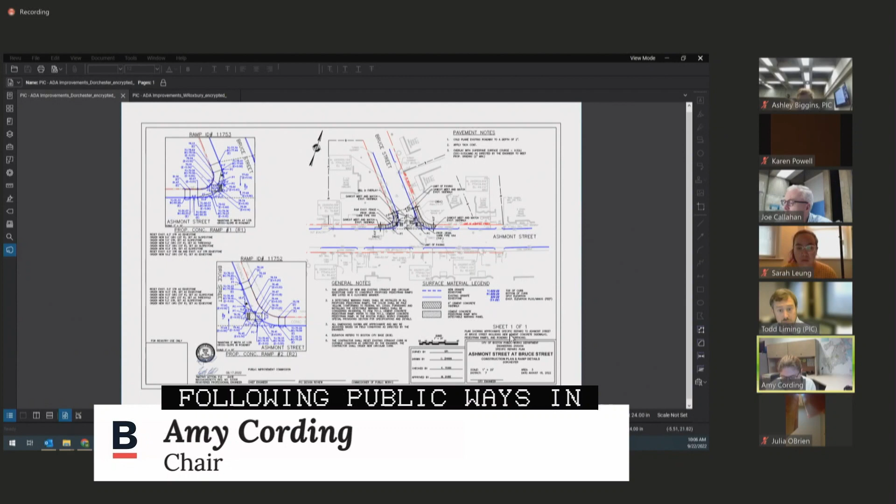Public hearing on a set of petitions by the City of Boston Public Works Department for the making of specific repairs within the following public ways in Dorchester and West Roxbury, consisting of curb realignment, roadway and sidewalk reconstruction, as well as new and relocated pedestrian ramps, storm drain infrastructure, and driveway curb cuts: Ashmont Street on its northerly side at Bruce Street at Ashmont Street, Boylston Street on its northeasterly side at Belmore Terrace at Boylston Street.

New business 825-2022 is shown on 2 plans entitled City of Boston Public Works Department Engineering Division Prepared Plan, Ashmont Street at Bruce Street, Dorchester, 1 sheet dated August 18th, 2022, and a City of Boston Public Works Department Engineering Division Specific Prepared Plans, Boylston Street at Belmore Terrace, West Roxbury, 1 sheet dated August 18th, 2022.

Good morning, Commission. Jeffrey Alexis with the City of Boston Public Works Engineering Division. I'm here joined by Michael Dube and Joe Johnson from GPI. In collaboration with our Public Works Construction Management Division, we are proposing to make some pedestrian safety improvements at these 2 locations, Ashmont Street and Bruce Street, as well as Boylston Street and Belmore Terrace, to essentially put these ramps in compliance.

It requires some curb geometry changes, as well as some drainage work. I will turn it over to Michael Dube to explain a little bit more of what we're going to do at these locations. Thanks, Jeff. Michael Dube with GPI.

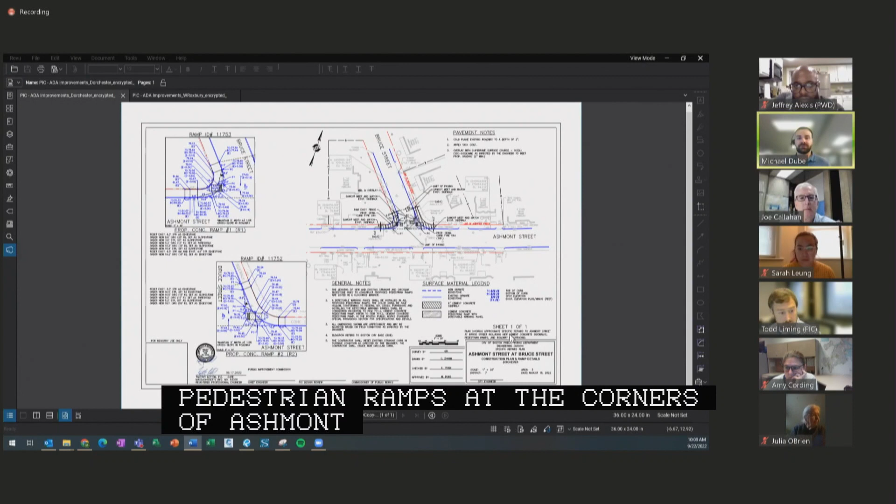First location, as Jeff mentioned, is Ashmont Street at Bruce Street in Dorchester. Scope of the work includes reconstructing 2 existing pedestrian ramps at the corners of Ashmont and Bruce Street to provide ADA compliant pedestrian ramps. Work includes minor realignments of curb lines to better align the approach and minimize pedestrian crossing length, sidewalk reconstruction, and pavement mill and overlay.

We also have a second location, which is Boylston Street at Belmore Terrace in West Roxbury. Again, we're installing 2 ADA compliant pedestrian ramps at the corners of Belmore Terrace and Boylston Street. The work includes minor realignment of curb lines to align the Belmore Terrace approach and minimize pedestrian crossings, sidewalk reconstruction, pavement mill overlay, and the reconstruction of one drainage structure at the northeast corner.

During the initial new business hearing, there was one comment to coordinate with BTD regarding a future contraflow bike lane on Boylston Street. We reached out and BTD indicated there was no conflict between our plan and those future bike lane improvements. I'm happy to answer any questions.

Questions or comments from commission members? PIC staff? All set. All right, I'll entertain a motion on public hearing item number 1.

I make the motion to approve a set of petitions by the city's Public Works Department for specific repairs at Ashmont and Bruce Streets, and also Boylston Street and Belmore Terrace, as more particularly read into the record by the chair.

Second. All in favor? Aye. Aye. Aye.

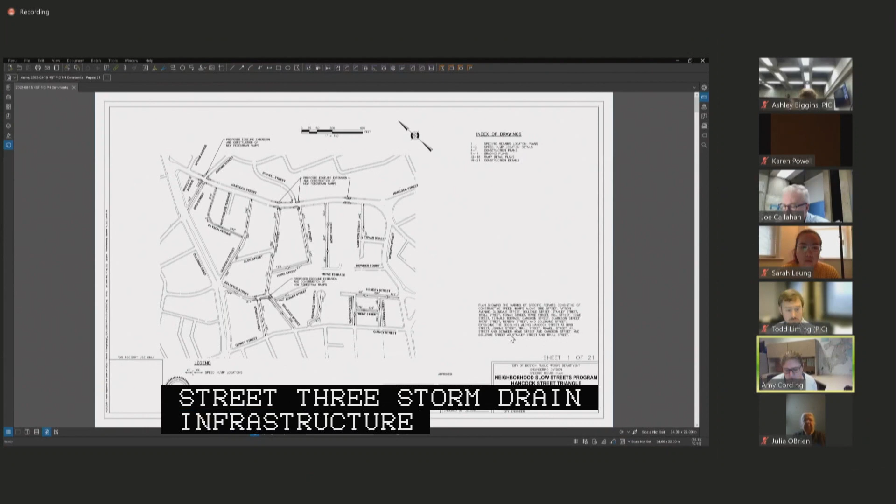Hancock Street, generally between Bowden Street and Columbia Road. Birch Street, generally between Hancock Street and Columbia Road. Payson Avenue, generally between Hancock Street and Glendale Street. Glendale Street, generally between Hancock Street and Columbia Road. Bellevue Street, generally between Quincy Street and Columbia Road. Stanley Street, generally between Quincy Street and Bellevue Street. Trull Street, generally between Hancock Street and Bellevue Street. Ronan Street, generally east of Bellevue Street. Ware Street, generally between Trull Street and Rill Street.

Rill Street, generally between Hancock Street and Ware Street. Howe Street, generally between Hancock Street and Howe Terrace. Ferndale Terrace, generally northeast of Quincy Street. Cameron Street, generally between Hancock Street and Tovar Street. Clarkson Street, generally between Quincy Street and Trent Street. Trent Street, generally between Clarkson Street and Coleman Street. Henry Street, generally between Bowden Street and Clarkson Street. Coleman Street, generally between Henry Street and Trent Street. Jerome Street, east of Hancock. Rowell Street, northeast of Hancock Street.

New business, 8/25/2022, is shown in a set of plans entitled City of Boston Public Works Department Engineering Division Specific Repair Plan, Neighborhood Slow Streets Program, Hancock Street, Triangle, Dorchester, 21 sheets, dated September 22nd, 2022.

Hi, good morning. Dan Merrill from the Boston Transportation Department. I've been working on these plans with Public Works. This is the latest in our neighborhood slow streets zones, as mentioned, and I have Radu Nan from Kittelson here, who is going to walk you through the plans.

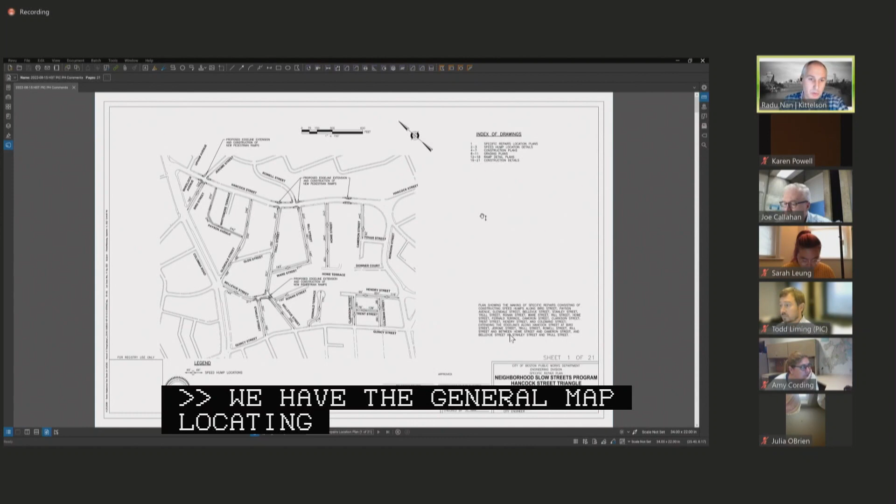Thanks, Radu. Good morning. In front of you, we have the general map locating the speed humps proposed for the interior streets within the zone. The plans propose installing 24 speed humps, generally spaced between 300 and 150 feet apart. The distance between these speed humps was determined based on field observations.

I have some specific sheets outlining the individual location of the speed humps that I can flip through, but before moving on to those and specific repairs at specific intersections, I'll entertain any questions.

Questions or comments from commission members? Questions or comments from PIC staff? We're all set on the speed humps. Do have a couple comments on some of the curb extensions, but I'll let Radu present that first.

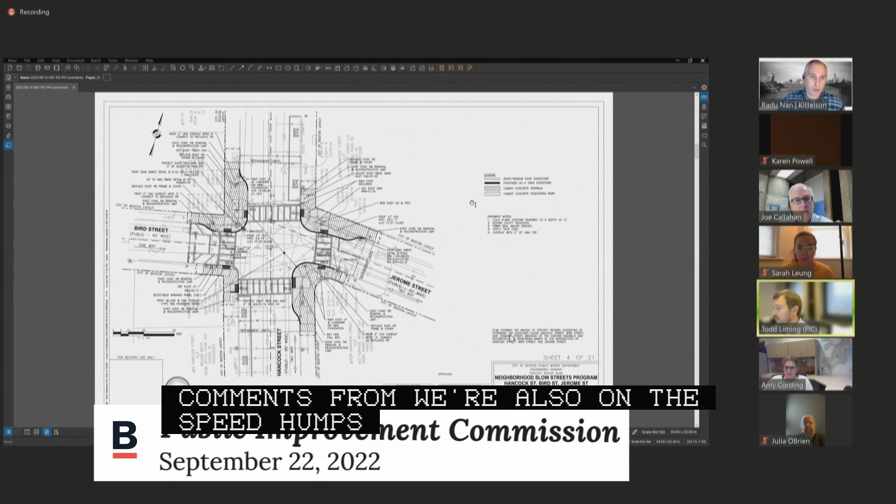Sure. Thank you, Todd. The first intersection we're focused on your screen right now is between Hancock Street, Bird Street, Jerome Street. The specific repairs at this intersection include minor realignment of the curb lines, reconstructing of sidewalks, reconstructing pedestrian ramps on all corners to bring them into compliance with the ADA requirements, narrowing the street pavement widths to promote shorter, safer crossing for pedestrians, drainage improvements, streetlight relocations, and milling and overlay of the pavement surface within the intersection area.

Are there any questions specifically about this location? We can move on. All right, let's keep moving.

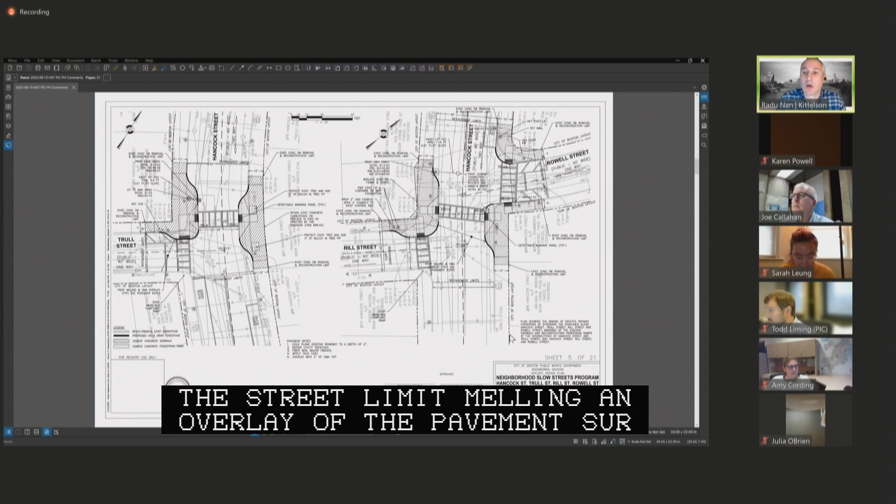All right. Next locations are the intersections of Hancock Street, Trull Street, and Hancock Street, Rill and Rowell. Similar street repairs as previously listed for the previous intersection, the realignment of edge lines along Hancock Street, Trull Street, Rill, and Rowell Streets, reconstructing of pedestrian ramps, narrowing of crossing distances for pedestrians, reconnections or adjustments to the street drainage infrastructure to maintain positive flows within the street limits, milling and overlay of the pavement surface, and I believe those are all of the proposed changes within these two intersections.

In one streetlight relocation.

Next location along Hancock Street is generally in front of 131. This is a charter school. The proposed specific repairs here include realignment of the curb lines on Hancock Street to narrow the existing crossing and constructing of ADA compliant pedestrian ramps to facilitate the crossing at this location. The reconstruction also includes sidewalk repair and two driveways and a new drainage inlet to maintain positive drainage within the street limit. Milling and overlay is also included within the limits of the reconstruction at this area.

Our last location is a system of two intersections, generally located on Bellevue Street, between Stanley Street and Trull Street.

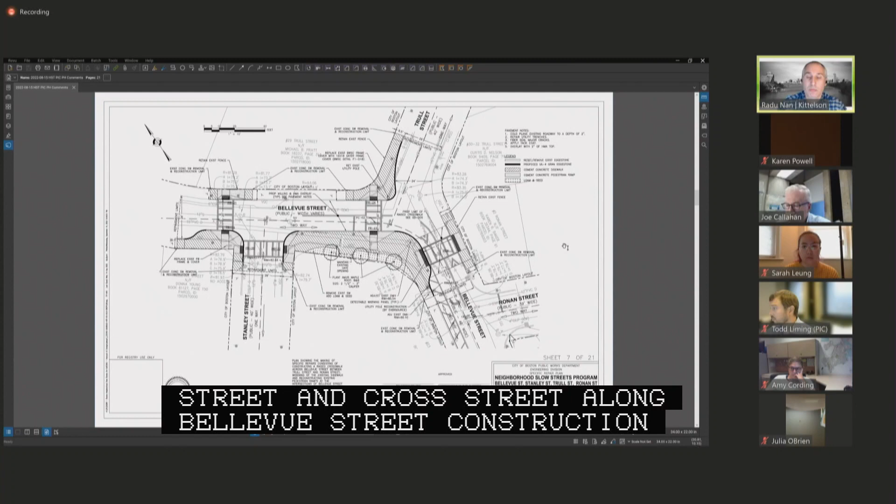The proposed repairs here include reconstruction of sidewalks and realignment of existing curb lines, expanding the sidewalk width between Stanley Street and Trull Street along Bellevue Street, construction of a raised crosswalk south of the Trull Street intersection with Bellevue Street, reconstruction of pedestrian ramps to make them ADA compliant, and the planting of new trees within approximately 290 feet of proposed pervious space along the Stanley Bellevue Park frontage.

I think Todd's got a question here, but it pertains to your loam and seed. Sure.

I had a conversation with Stephanie as well, with BTD, and she confirmed that these loam and seed areas here in front of the park are going to be switched out to standard tree pits, open tree pits within a cement concrete sidewalk. We'll make those adjustments and resubmit the plans for your records.

Yep, that'd be great. Just have that show up on the Mylar. It's perfect.

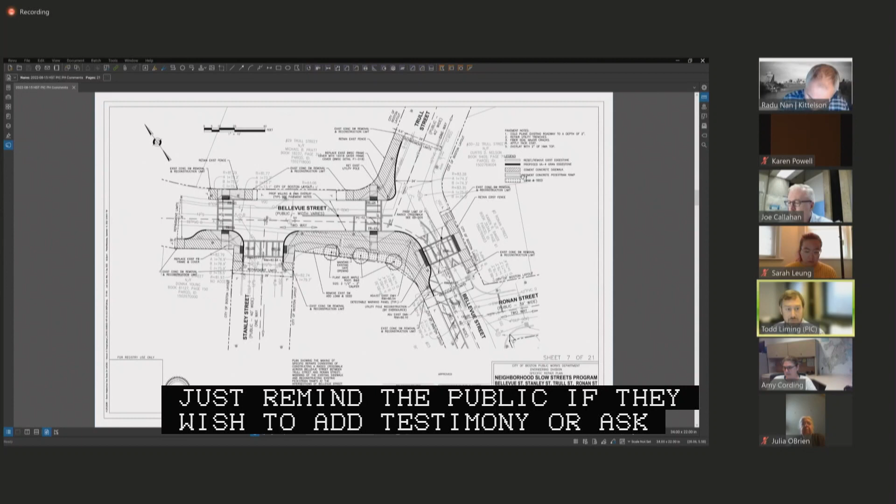I'll entertain a motion on public hearing item number 2. I make a motion to approve a joint petition by the city's Transportation Department and Public Works Department for the making of specific repairs in Dorchester, in the neighborhood of Hancock Street, and as the specific location as read into the record by the chair. Second. All in favor? Aye. Thank you.

Public hearing item number 3 on a joint petition by the City of Boston Transportation Department and the City of Boston Public Works Department for the making of specific repairs within the following public ways in Roxbury consisting of new speed humps. Abbotsford Street, generally between Walnut Ave and Harold Street. Brookledge Street, generally between Humboldt Avenue and Elm Hill Avenue. Crawford Street, generally between Walnut Avenue and Warren Street. Crestwood Park, generally north of Townsend Street. Deckard Street, generally between Warren Street and Humboldt Avenue. Harold Street, generally between Seaver Street and Waumbeck Street.

Harrishof Street, generally between Walnut Avenue and Humboldt Avenue. Hazelwood Street, generally between Warren Street and Sylvia Place. Hollander Street, generally between Holworthy Street and Crawford Street. Holworthy Street, generally between Hollander Street and Walnut Ave / Crawford Street. Homestead Street, generally between Walnut Ave and Elm Hill Avenue. Hutchings Street, generally between Elm Hill Ave and Harold Street. Munroe Street, generally between Walnut Ave and Humboldt Ave. Parkview Street, generally between Seaver Street and Hutchings Streets. Ruthven Street, generally between Walnut Ave and Elm Hill Ave.

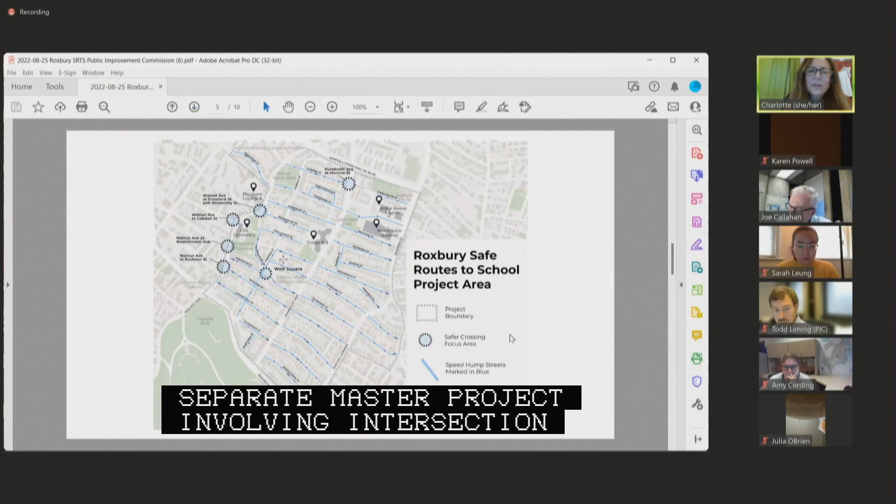There have been 3 sort of sub-projects out of this. There was a demonstration project last year involving a street mural. What we're discussing today is the second part, the speed hump project, and then there's a separate MassDOT project involving intersection improvements. This diagram, posted online, shows the 6 intersections where MassDOT will be making improvements, as well as the locations of the speed humps we're discussing today.

And the MassDOT project is on a different time frame. They expect to do more community engagement this fall and construction next year or the following.

So the speed hump plan involves speed humps distributed widely throughout the neighborhood on the residential streets, not on the main streets where we know there will be emergency traffic and buses. There are approximately 93 speed humps, spaced generally between 200 and 250 feet apart.

We avoided surface utilities, so any types of manholes, catch basins, any type of utility covers, streetlight covers. We avoided driveways, trying to stay a minimum of 10 feet away from any driveway. Where there is a driveway, we prioritized drivers backing out on one-way streets so that they wouldn't hit any speed humps while backing out. So I'll go back to the plan, and if there are any questions, I'm happy to answer.

Thanks, Charlotte. Questions or comments from commission members?

Questions or comments from PIC staff? No. For our phone-in testimony, you may press star 6 to unmute yourselves at this time.

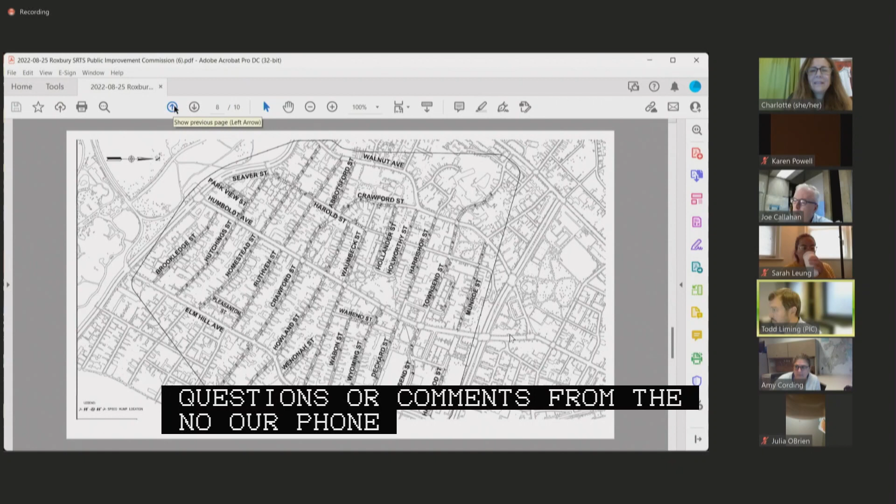Oh, can't hear you if you're speaking. For what it's worth, my understanding is that this individual is going to speak in support of this project. Charlotte may be able to fill in the blanks, but we invite you to try one last time, star 6. Yeah, he asked, so I've got him on speakerphone. I don't know if we'll be able to hear, but maybe we can try it. David, would you like to try speaking?

Yeah, good morning, can you hear me okay sir? It's pretty hard to hear. Yeah, let me try again. How about now, can you? That'll work, give it a shot. How are you? They're good. Oh, keep, got to say something. I can't hear him. Yes, I think they're interested in hearing your comments.

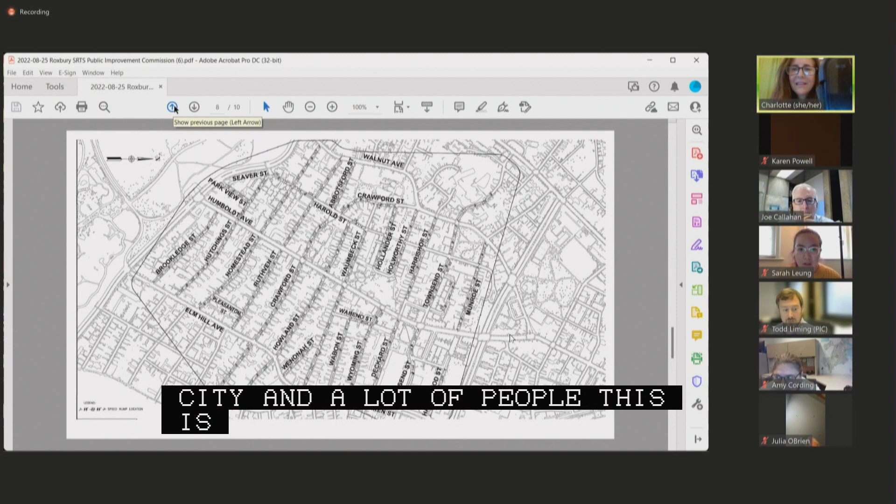I'm sorry, Charlotte, he's breaking up. We really can't understand what he has to say.

The audio's not working, but if I can summarize, he's saying that he's blind, and there are many people on the street who are very concerned about the speeding, up to 50 miles an hour, so he strongly supports the speed humps and wants them to happen soon. Is that a fair assessment?

Yes, and also let them know that people are afraid to get out of their cars because of the speed that drivers travel at on that street — they're afraid a car will take the driver's door off or the passenger door off and drag them down the street as well. So, people are afraid to get out of their cars, afraid that they will get dragged down the street.

Great, any other questions or comments from the public? All right, hearing none, I'll entertain a motion on public hearing item number 3.

I make a motion to approve a joint petition by the City Transportation and Public Works Department for the making of specific repairs in the general area of Humboldt Ave, Warren Street, and Harold Street, with the specific locations as more particularly read into the record by the chair. Second. All in favor? Aye. Aye.

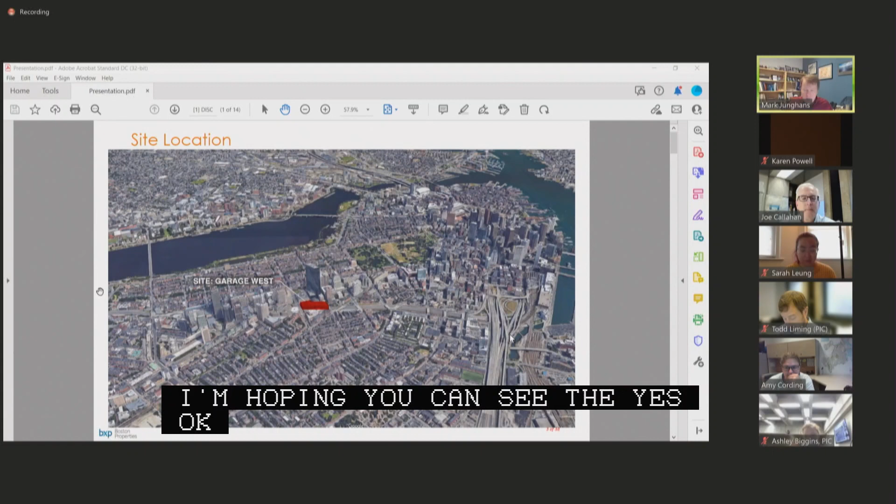This is for 171 Dartmouth Street, the first phase of the Back Bay South End Gateway project. I'll zoom in a little. It's located at the intersection of Stuart Street and Dartmouth Street in the Back Bay, next to the formerly John Hancock Building. This is the existing garage being redeveloped as the Back Bay South End Gateway project.

The first phase involves a 28-story office building with associated ground floor retail. You can see the existing Back Bay station here. These are future buildings currently planned, the Simon Building here, and then 3 future phases of this project. The building we're talking about today is the one in white.

It was presented a couple weeks ago, but I thought I'd give a quick refresher. This is Dartmouth Street here, Stuart Street just in the background. The proposed project is shown here. Once again, Dartmouth Street here, Stuart Street running into the frame.

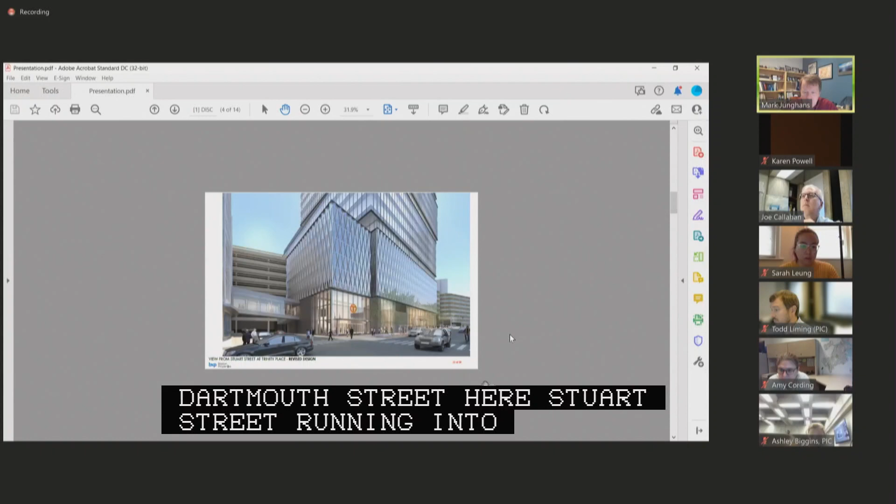This is a view on Stuart Street. One of the features of this building is that it takes what is currently a wall on Stuart Street and turns it into the building's front door. More importantly, it creates a portal where pedestrians can go right through the building and get to Back Bay Station, where right now you have to go all the way around the block and up Dartmouth Street to get there. This provides a dedicated passageway through the building to Back Bay Station.

You can see part of the existing garage here. This building reutilizes that garage and integrates it into the building. This street here is Trinity Place, which up to about this proposed pedestrian bridge is an existing public way, and we're proposing to make modifications to Trinity Place as part of this project.

This is a close-up view on Dartmouth Street. Right now there are stairs and it's not permeable and does not engage the street. The proposed project addresses that with the new lobby for the building here and then activated retail all the way up to the Back Bay Station entrance. Also substantial improvements in the street, which we'll get to.

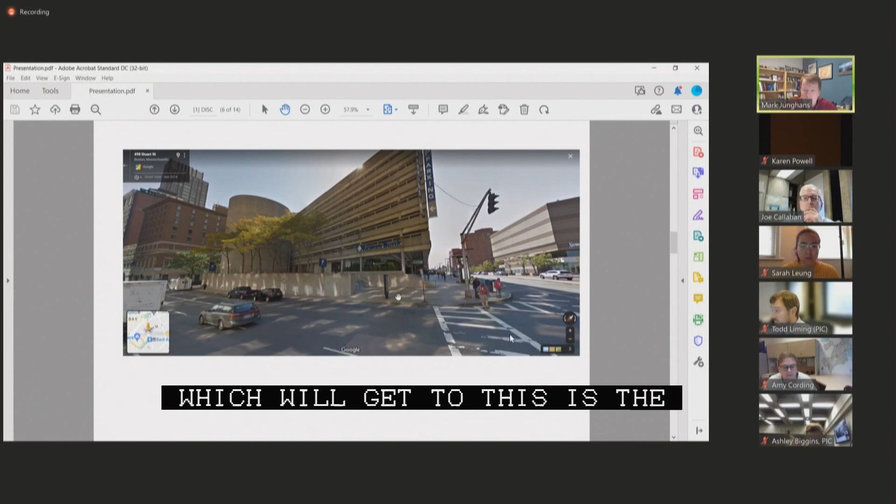This is the existing condition along Stuart Street. The building is not engaging with the public realm. This portion of the garage will be demolished and integrated into the building, and what we're going to end up with is something just a little friendlier.

The first action being proposed is the widening and relocation of Trinity Place. Once again, Trinity Place is a public way. A portion of it is owned as private fee, a portion as public fee. In the existing condition, Trinity Place only has a sidewalk on one side. The widening and relocation is intended to widen the right-of-way so that there can be a public sidewalk on both sides of Trinity Place, creating a continuous public pedestrian path that ties back to Stuart Street.

This is a result of design coordination between Mass DOT, who is the site owner. This is an air rights project, just as a reminder, where it's a cooperative effort between Boston Properties as the owner and Mass DOT. So the widening and relocation provides the space for a sidewalk on both sides while maintaining the function of Trinity Place.

I think that's it for this action. It is being given as an easement for highway purposes and has been coordinated with the legal department within Public Works. Questions or comments by commission members?

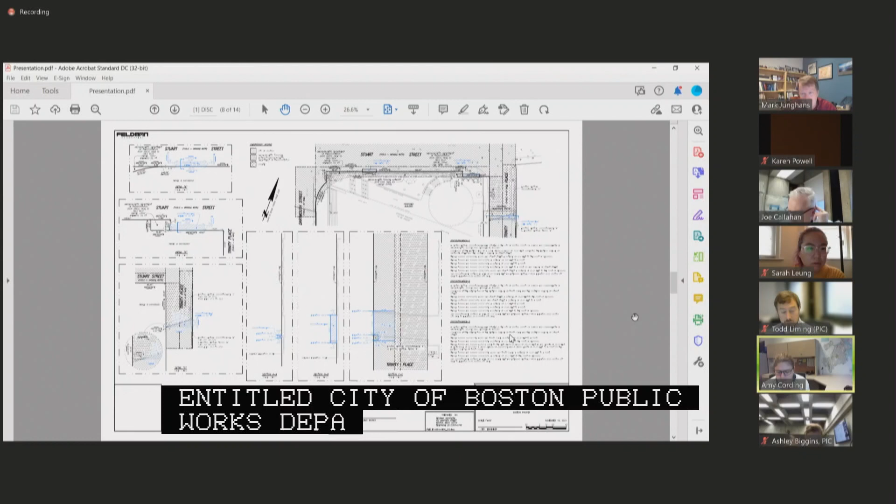Mark Junghans with VHB, presenting on behalf of Boston Properties and the design team for 171 Dartmouth, the first phase of the Back Bay South End Gateway project. This portion is for discontinuance of two small areas on Stuart Street where building entry canopies are located: one over the entrance to the Back Bay Station connector, and one for the main building entrance.

There's also a proposed vertical discontinuance for the pedestrian bridge on Trinity Place. The pedestrian bridge design has been coordinated with Inspectional Services, Boston Water and Sewer, and the fire department to ensure the clearance provided is appropriate. We also did proactive utility upgrades in this area so that maintenance access for machinery wouldn't be necessary for quite a long time.

This pedestrian bridge is limited to the area shown here. A portion of this building is owned in fee by a private party, and the portion we're discussing now is owned in fee as public. So we're discontinuing these three pieces, which are part of existing public ways fee-owned by the City of Boston, as discontinuances to support these project elements.

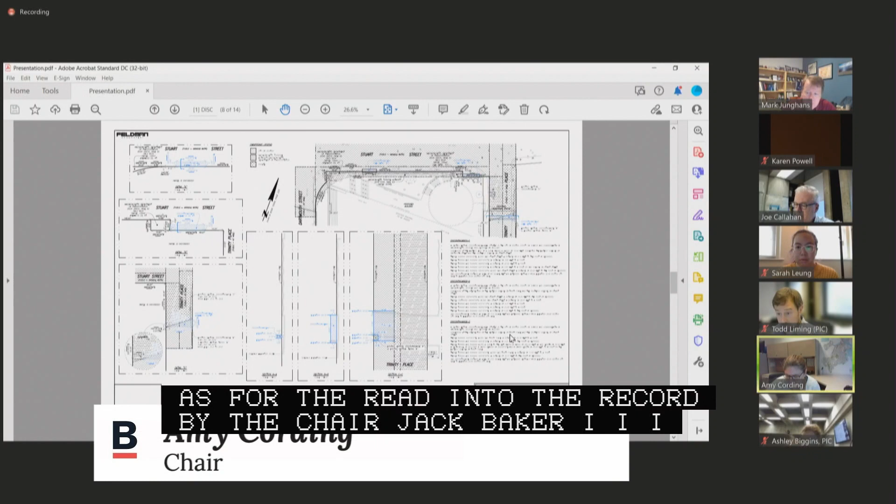Public hearing item number 6, on a joint petition by BP Hancock LLC, Trinity Stuart Development LLC, and the Massachusetts Department of Transportation for the vertical discontinuance of portions of Trinity Place Public Way, Boston proper, located on the southeast of Stuart Street, vertically above the grade of the roadway. New business 825-2022, shown on a plan entitled City of Boston Public Works Department Engineering Division Discontinuance Plan, Vertical, Trinity Place, Boston proper, one sheet dated November 16, 2021.

This is for the privately owned portion of the land where the proposed pedestrian bridge is located within Trinity Place. Let me go back to the plan, sorry about that.

Okay, here we are. This triangle here is the privately owned land where the pedestrian bridge is going to be located, so the public street rights we're requesting be extinguished are in this vertical space above the roadway, just where the proposed pedestrian bridge will be located. So it's really just for this one area.

Questions or comments by commission members? Questions or comments by PIC staff? All set. I'll entertain a motion on public hearing item number 6.

I make a motion to approve a joint petition by BP Hancock LLC, Trinity Stuart Development LLC, Massachusetts Department of Transportation for the vertical discontinuance of portions of Trinity Place, as further read into the record by the chair.

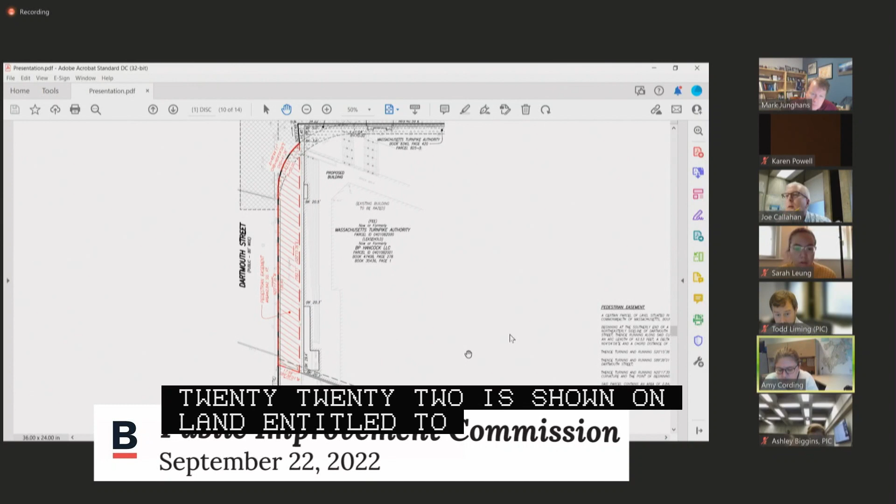Boston proper, located on its northeasterly side at address number 171, southeast of Stuart Street. New business 825-2022, shown on a plan entitled City of Boston Public Works Department Engineering Division Pedestrian Easement Plan, Dartmouth Street, Boston proper, one sheet dated March 4th, 2022.

This action is related to providing public pedestrian easement rights over what is the existing sidewalk along Dartmouth Street. This existing sidewalk is actually part of what was the air rights development, but a public pedestrian easement needs to be provided here to create continuous public pedestrian rights.

So we're proposing about a 15-foot wide easement that extends from the property line, which is actually just behind the curb, to a spot just in front of the proposed building, so that there's a constant 15-foot wide public pedestrian right along Dartmouth Street where there is not one there today. This is being provided by MassDOT as the site owner.

Questions or comments by commission members?

PIC staff, all set? I'll entertain a motion on public hearing item number 7.

I make a motion to approve a joint petition by BP Hancock LLC and the Massachusetts Department of Transportation for the acceptance of a pedestrian easement adjacent to Dartmouth Street, as further read into the record by the chair. Second. All in favor? Aye.

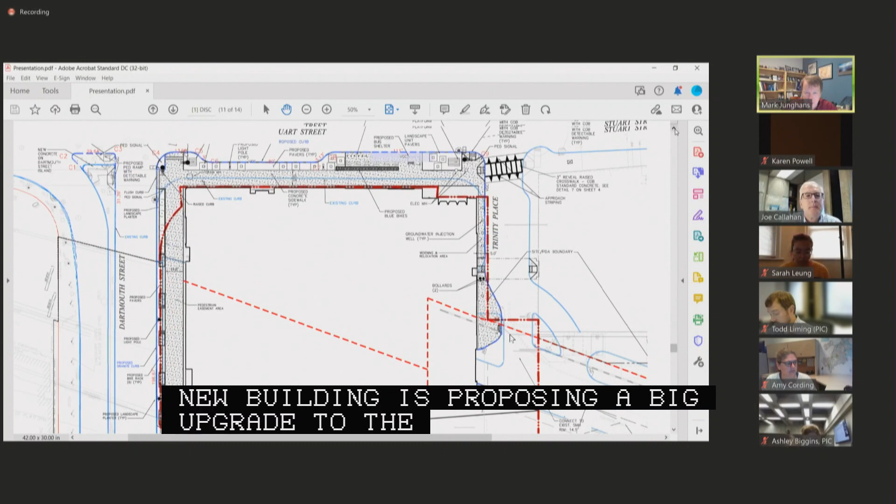We've spent a lot of time with BTD and disabilities and the BPDA coming up with a streetscape design that makes sense. You'll note that this blue line here is the existing curb line. The project massively upgrades the pedestrian realm, provides a bus stop and shelter, bike racks, landscaping improvements, and signal and roadway curb updates, including bump outs on both sides of the road that are included as part of this project to complete what BTD and disabilities would like to see on Stuart Street.

The proposed project is providing planters, in-ground planters where possible. This area along Dartmouth Street is a structure over the highway, so we're providing containers above ground to support the trees. All of this hatching is concrete pavement, so it is City of Boston standard and what the Disabilities Commission ideally likes to see as a public pedestrian path.

Over the last 2 weeks, we've made some updates to the plans based on comments from BTD, and we are providing a raised crosswalk here at the intersection of Stuart Street and Trinity Place to signal vehicles that this is different from the main road, because this provides a lot of pedestrian access. It's the front door to the 40 Trinity project. It also provides access to the existing service areas, to make sure that it's clear that this is a different kind of space and will protect those pedestrians.

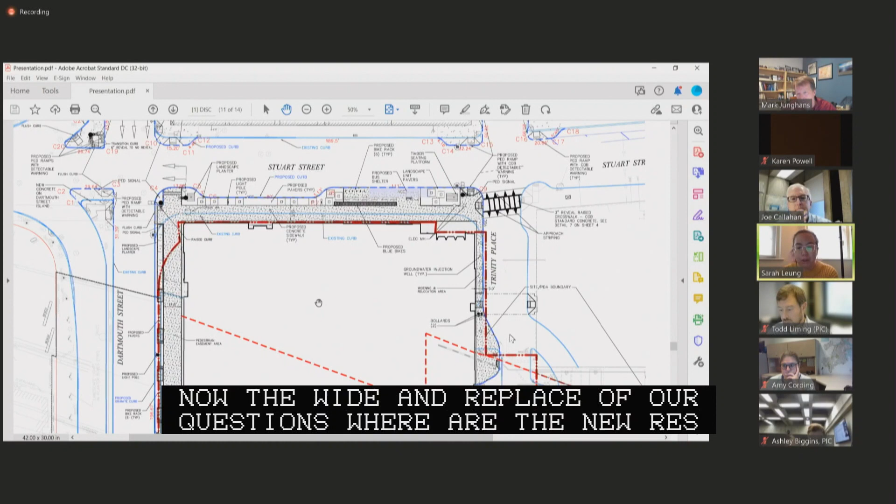For the new raised crossing, it's showing ramps. Will it be a ramp crossing, or will it be completely flush at Trinity Place? We're proposing a 3-inch raised crosswalk, which means these ramps in the end will get smaller. We just hadn't caught up with this ramp yet. We have to make sure that our reciprocal ramps are compliant, and the reason is because we do expect a decent amount of truck traffic coming in and out of here. The 3 inches was a good compromise between a fully flush condition and a street level condition.

Great, thank you. I mean, if you end up with the ramp on the other side, lowering that down might make it flush without coming up, right?

I guess we'll give this design, when it's finally back with grades and everything on it, to me and Sarah. I think we understand the intent here, but it seems like maybe rather than having this weird 3-inch thing, if both sides came down to that, we could get it to look almost like a continuous sidewalk, albeit slightly depressed. Oh, I see what you're saying. Yeah, I'd love to take a look at that and finalize it. That would make for a nicer sidewalk and yet not compromise the truck angle. Oh yeah, and it'll feel more continuous as well. Yeah, all right, that's great.

Thank you. Any other comments from commission members?

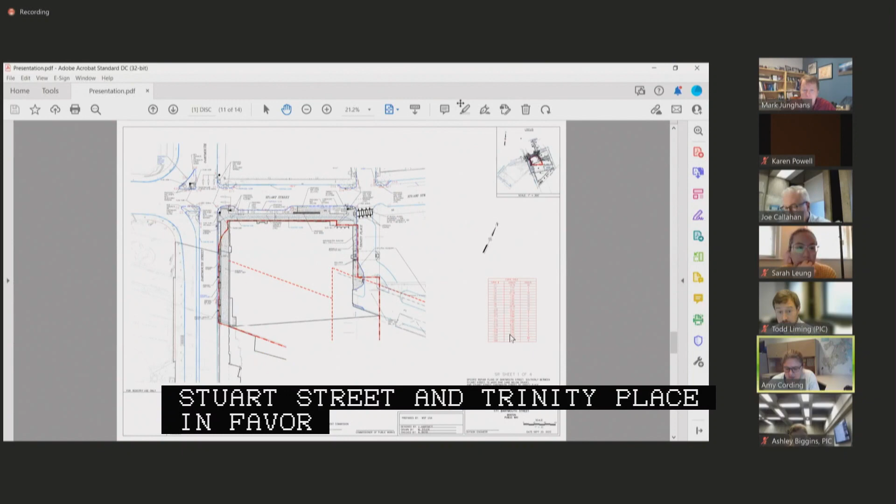Aye. Motion passes. Public hearing item number 9, on a petition by LBC Boston Partners Properties LLC for the acceptance of pedestrian easements adjacent to the following public ways in Brighton: Linden Street on its easterly side at addresses number 16 to 22 between Cambridge Street and Pratt Street, on its northeasterly side at address number 6 east of Linden Street.

New business 8/25/2022 is shown on a set of plans entitled City of Boston Public Works Department Engineering Division pedestrian easement plan, Allston Green, 16 and 22 Linden Street and 6 Pratt Street, Allston, 2 sheets dated August 17, 2022.

Good morning, Tim Hayes from Bohler Engineering, representing LBC Boston Partners Properties LLC. I have with me Guy Busa from Howard Stein Hudson, traffic engineer, as well as representatives from LBC on the line, Margarita and Sabrina. We presented at the last hearing. My colleague Steve Martirano was the one presenting, but he has a conflict today, so I'm presenting on his behalf. Let me share my screen with you guys.

Is that working? Yes, thank you. So this is a similar presentation that we prepared last time. I'll go through it quickly just to familiarize everyone with the site: 16 and 22 Linden Street and 6 Pratt Street, otherwise known as Allston Green.

Located here, to orient you, this is Cambridge Street Bridge, Linden Street through here, and Pratt Street. So our project is the red, fronts on both Pratt Street and Linden Street.

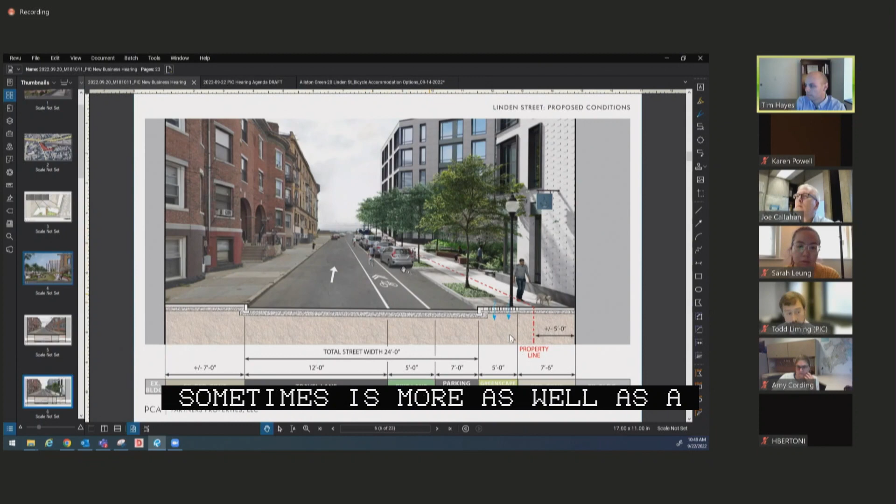Getting into the streetscape, this is the existing view of Linden Street looking towards Cambridge Street in the background. Today there's about a 7-foot sidewalk adjacent to the building that's going to be demoed, a 7-foot parking lane, and about a 17-foot clear lane for the one-way drive towards Cambridge. The proposed condition, we're providing a minimum 5-foot sidewalk, some places more, as well as a 5-foot furnishing zone with street trees and pavers, a parking lane, and a bike lane outside of that.

And this is over on Pratt Street, so we're on Pratt Street standing looking at Linden Street. Existing conditions today, it's a 2-way street with parking on the left-hand side and a 6'6" sidewalk, just a concrete sidewalk. We're providing, again similar to before, a 5-foot minimum sidewalk, some additional space sometimes at the building facade, moves in and out, and then a 4-foot greenscape furnishing zone with lighting and street trees as you go down.

Comments in the last hearing were, I think, in regards to 2 ramp locations, which we have worked with accessibility to come up with some solutions that I think are better than what we had before. Tim, sorry to cut you off. We're just, let's focus on the pedestrian easement action, and then we can move to the specific repairs after that. Apologies, Todd. The pedestrian easement actions, I will flip down, that we're requesting are to grant a pedestrian easement both on Linden Street in order to provide the complete streets.

In this location, it's about a 4-foot easement all along Linden Street, and then similarly on Pratt Street, we're going to have a granted pedestrian easement here. What you're seeing in red is the easement itself behind the existing sidewalk today. So that would be what we're looking for, the granted pedestrian easement.

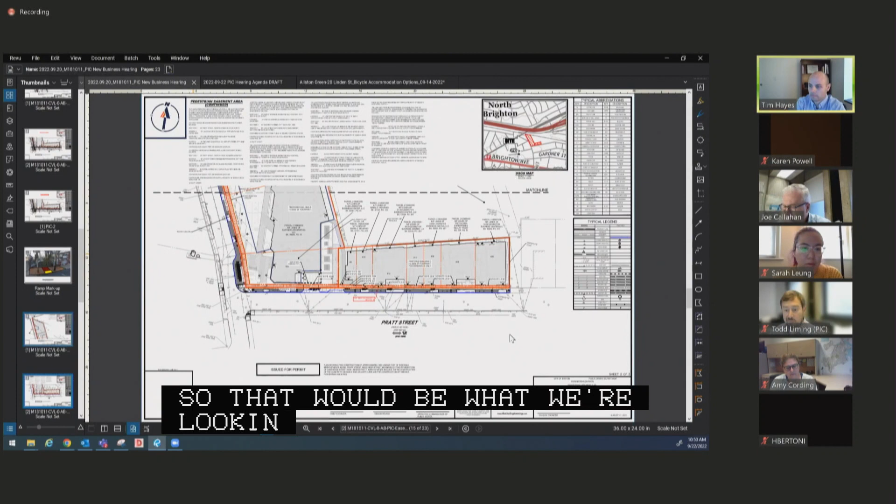Any comments or questions from the commission on that piece? Questions or comments from commission members? PIC staff? We're good on the easement, thank you.

All right, I'll entertain a motion on public hearing item number 9. I make a motion to approve a petition by LBC Boston Partners Properties LLC for the acceptance of pedestrian easements at Linden Street and Pratt Street, and more further read into the record by the chair. Second. Second. All in favor? Aye. Aye. Great.

Motion passes. Public hearing item number 10 on a petition by LBC Boston Partners Properties LLC for the making of specific repairs within the following public ways in Brighton, consisting of curb realignment, roadway and sidewalk reconstruction, as well as new and relocated pedestrian ramps, specialty pavement, street lighting infrastructure, street trees, planters, landscaping, irrigation infrastructure, storm drain infrastructure, bike racks, and driveway curb cuts.

Linden Street generally at address numbers 16 to 22 between Cambridge Street and Pratt Street generally at address number 6 east of Linden Street, Cambridge Street on its southerly side at Linden Street, new business 82522, is shown on a set of plans entitled City of Boston Public Works Department Engineering Division Specific Repair Plan, Allston Green, 16 and 22 Linden Street and 6 Pratt Street, Allston, 5 sheets dated August 17, 2022, revised September 6, 2022.

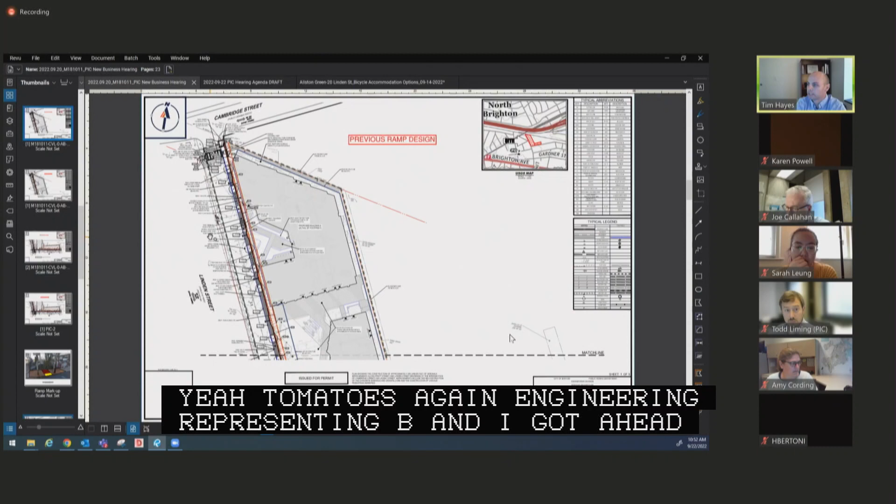Tim Hayes again with Bohler Engineering representing LBC. For the specific repairs, I think that the questions that came up last time during our hearing were in regards to a couple ramps to have a study.

So we took a look at both the ramp and crosswalk connection up at the intersection of Cambridge Street and Linden Street, which is showing here. And subsequently, we looked at another ramp connection at Linden Street and Pratt Street that I will flip over to. But generally, the comment during the last hearing was that it's a difficult ramp and crosswalk location, given that it was set back from Cambridge Street so far.

So we took another look at it and had some coordination with accessibility to look at another version where we actually move that ramp as far as we could towards the north, towards Cambridge Street, to make sure that we could provide a better sight distance and provide that stop bar a little closer to the Cambridge Street intersection.

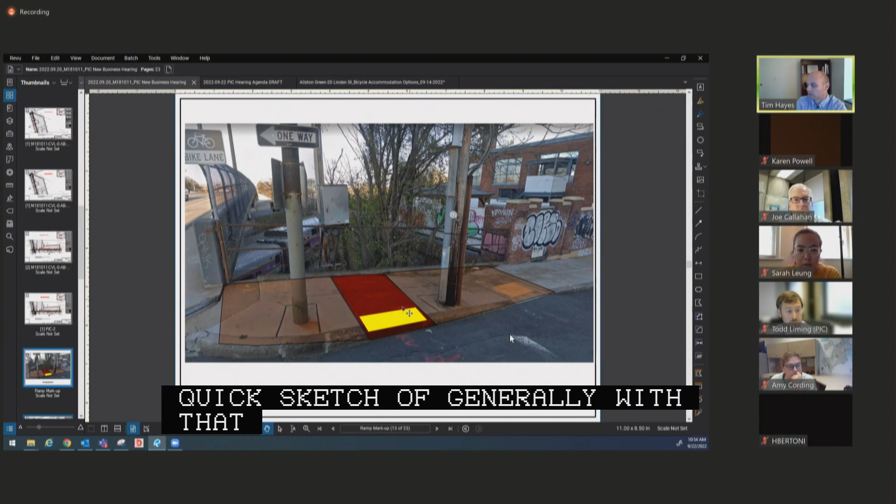So that's what's reflected here - if I go from previous to revised, you can see we moved it about 8 feet as far as we could north. I did a quick sketch of generally where we previously had the ramp, and this is kind of crude, but generally the ramp's going to be in between the existing pole and the guy wire pole, and all the work would be before the bridge abutment.

So I think we did some studies, went out there, took measurements, and made sure this all could work. We believe that the ramp we can provide here is going to meet the accessibility code. So that was the first ramp we looked at, and then the second ramp we were asked to look at was the ramp over on Pratt Street.

There's a utility pole that's somewhat problematic for this ramp at the location we previously had. We studied this one as well, and we took a look at moving that over, getting it clear of the utility pole. We're able to provide this ramp location and revised crosswalk and revised reciprocal ramp on our site to accommodate and get that pole out of the way of the clear landing zone of the ramp itself.

So I think we sent both those over to accessibility, and I think we got positive feedback on that. So happy to answer any questions on that front, or go back to plans if folks want to look at anything.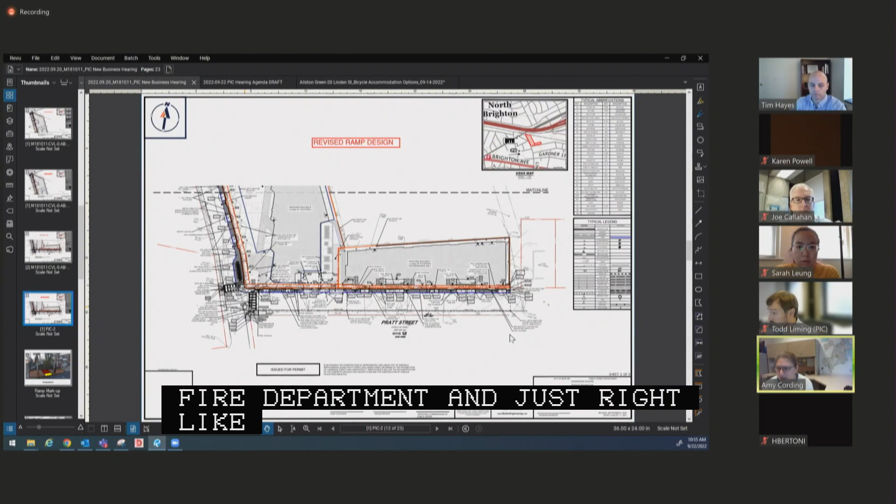I know that Guy had sent over a bunch of stuff regarding the bike lane, and I think we had maybe sent something to the fire department and haven't finished that. I didn't want to slow you guys down, so that is as of yet unresolved. Hopefully its resolution, or any of our modifications, will come in paint, so it won't necessarily impact anything here. But I want to leave that as where the bike lane will be is an unresolved issue, but I didn't think you guys would want me to push you off the agenda, so I think we can resolve that after the fact.

Appreciate that. Did you want to go through those options now, or is that? Well, I think we have some questions out to fire, which will largely govern what we're allowed to do here, right?

I think we were taking on the fact that the conversation with fire can happen via us, not from you, about when we get down below 20 feet. I don't think we've gotten any resolution, so I'll make this vote contingent upon that resolution, but hopefully it won't substantially change anything appearing on these Mylars.

So we would go with the parking protected bike lane, basically, Amy, right? Yeah, right. The problem is getting wrapped up in other larger conversations we're having with them, so it's hard to get a project-specific conversation free and clear. But I think we'll have an answer, and any changes we'd be asking for we can make on the Mylar.

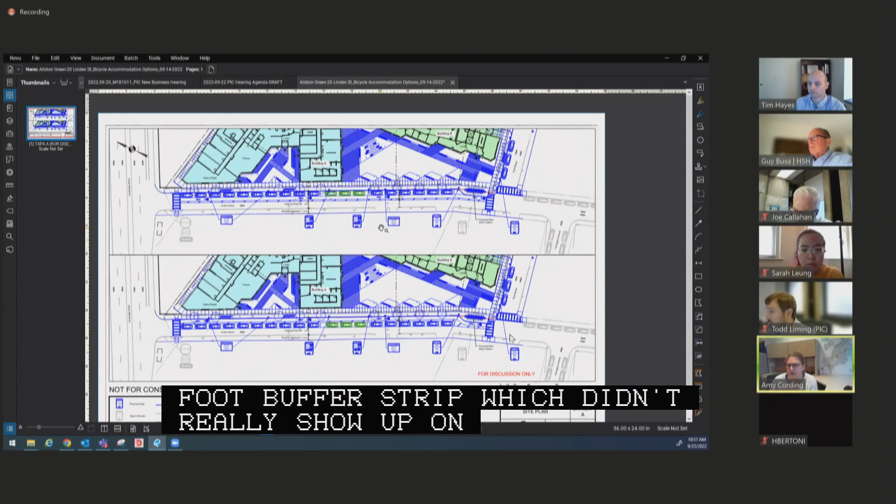Yeah, and like I said, we're having a conversation with fire, but it's about multiple things, so I'll try to shake a specific answer on this one loose. I wanted to be able to at least vote today, contingent on that, so you guys don't have to continue the hearings. Let me know if you need any support on that, Amy, we can help out.

Yeah, well, we're entering slowly. Yes. Okay, thank you.

Any other questions or comments by commission members? I just wanted to thank the project team for taking another look at those two ramps. We really appreciate the effort to get better crossings at these locations. Well, thanks, Sarah, I think it worked out better in both locations.

Any other questions by PIC commissioners? PIC staff? All set. All right, I'll entertain a motion on public hearing item number 10, contingent upon the resolution of the bike lane design with BTD.

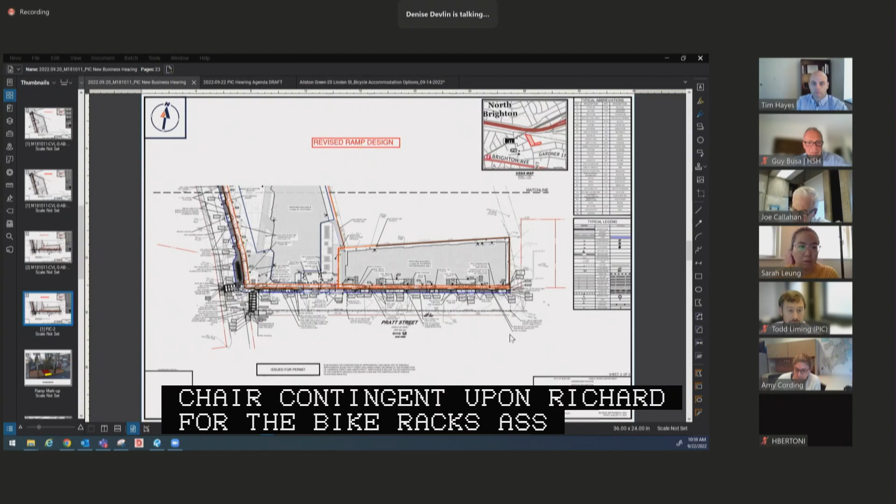I'll make a motion to approve public hearing number 10 on a petition by LBC Boston Partners Property for the making of specific repairs within the following public ways in Brighton: Linden Street, Pratt Street, Cambridge Street, as read into the record by the chair, contingent upon BTD approval of the bike racks, as shown on a set of plans entitled City of Boston Public Works Department Engineering Division Specific Repair Plan, revised September 6, 2022. Second. All in favor? Aye. Great.

Public hearing item number 11 on a petition by CCC River LLC for the acceptance of a pedestrian easement adjacent to the following public ways in Hyde Park: River Street on its northerly side at address numbers 1185 to 1203, west of Central Ave; Central Ave on its westerly side at address number 12, north of River Street, new business 8/25/2022, as shown on a plan entitled City of Boston Public Works Department Engineering Division Pedestrian Easement Plan, 1185 and 1191 to 1203 River Street and 12 Central Ave, Hyde Park, one sheet dated August 2nd, 2022.

Morning, members of the board, Attorney John Pulgini on behalf of the developer's proposal. This proposal is located at 1201 River Street, between Harvard Ave, Central Ave, and Winthrop Street at the rear. It's currently a single-story retail node with an auto repair shop on Central Ave. This proposal has been approved for 63 senior affordable housing units, and as part of the permitting and community process, certain street improvements were requested together with a pedestrian easement, pulling the building back, adding street trees, relocating a street light to the rear, and replacing a stretch of sidewalk in disrepair on Winthrop Street. With me this morning is Fred Keylor from H.W. Moore, who will walk you through the plans. Thank you for having us.

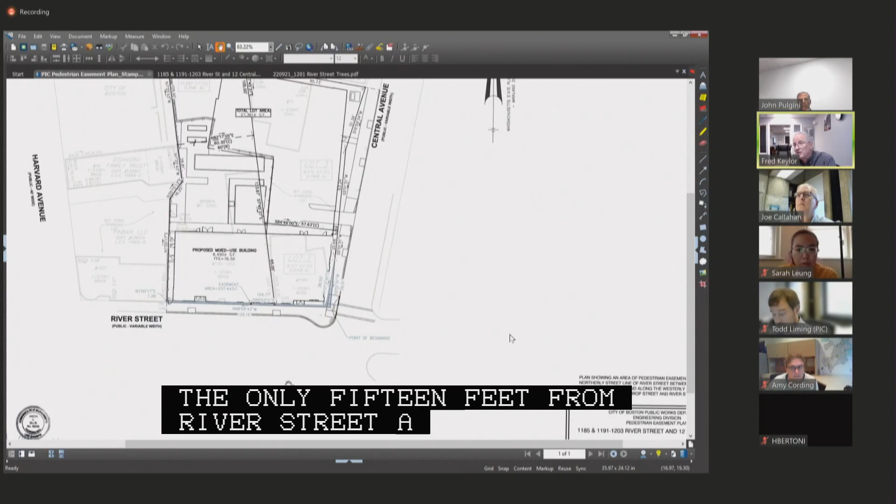Good morning, Fred Keylor from H.W. Moore Associates. We're looking at the proposed pedestrian easement along River Street, public to the corner of Central Ave. The easement is required to provide a 5-foot wide pedestrian path of travel behind the existing tree pits on River Street, and also to encompass the pinch point at the corner of River and Central, where the property lines pinch in, providing less than a 5-foot pedestrian path of travel. The easement is about 1.26 feet along River Street and a little wider at the corner of Central, as shown on the plan. Happy to answer any questions anyone might have.

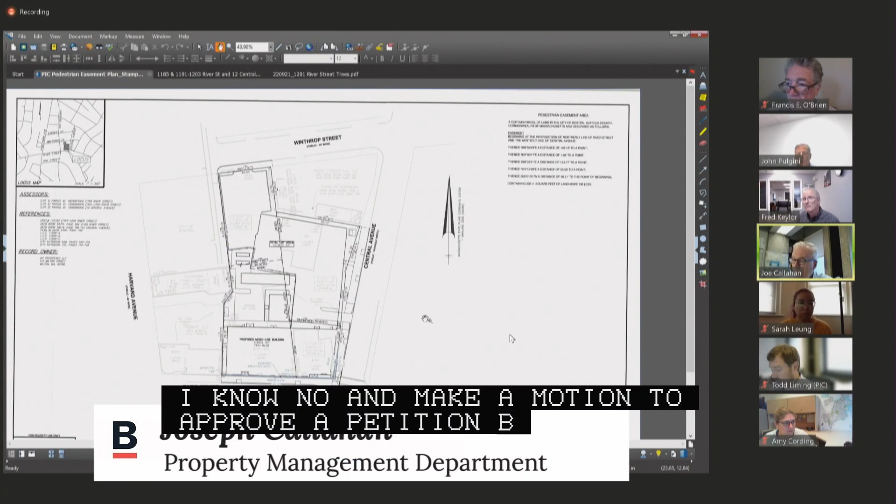I make a motion to approve a petition by CCC River LLC for the acceptance of a pedestrian easement in the location of River Street and Central Ave, as more specifically read into the record by the chair. Second. All in favor? Aye. Aye. All right, motion passes.

Public hearing item number 12, on a petition by CCC River LLC for the making of specific repairs within the following public ways in Hyde Park, consisting of curb and sidewalk reconstruction, as well as new and relocated pedestrian ramps, specialty pavement, street lighting infrastructure, street trees, storm drain infrastructure, bike racks, driveway curb cuts, and raised crosswalk. River Street generally at addresses number 1185 to 1203, west of Central Ave generally at address number 12, north of River Street, Winthrop Street, on its southerly side generally west of Central Ave.

New business 82522 is shown on a set of plans entitled City of Boston Public Works Department Engineering Division Specific Repair Plan, 1185 and 1191 to 1203 River Street and 12 Central Ave, Hyde Park, 2 sheets dated August 2nd, 2022. Thank you again, Ms. Cording.

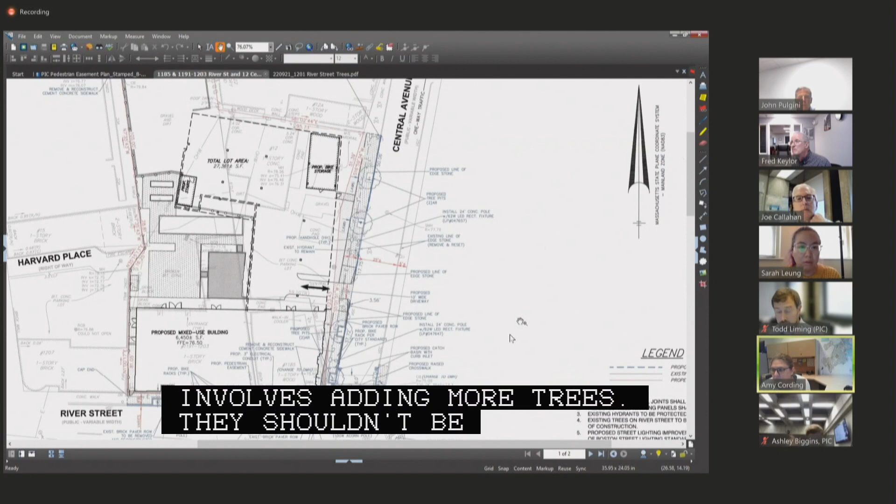PIC staff, further to that point: the addition of one tree on River Street may require the relocation of a street light. If that needs to happen, then the project will need to coordinate that with the street lighting division. And if that's not possible, then they'll just have to go with the trees they're showing here. But we'll coordinate that after the fact.

All right, I'll entertain a motion on public hearing item number 12. I make the motion to approve a petition by CCC River LLC for the making of specific repairs in the area of River Street, Central Avenue, and Winthrop Street, as more specifically read into the record by the chair. Second. All in favor? Aye.

Great, motion passes. Public hearing item number 13, on a set of joint petitions by IQHQ 109 Brookline 1 LLC and IQHQ 20 Overland LLC for the acceptance of pedestrian easements adjacent to the following public ways in Boston proper: Brookline Ave on its northwesterly side at address number 109, southwest of Overland Street; Burlington Ave generally on its northwesterly terminus, northwest of Brookline Ave.

New business 82522 is shown on two plans entitled City of Boston Public Works Department Engineering Division Pedestrian Easement Plan, Brookline Ave, Boston, one sheet dated April 15, 2022, and City of Boston Public Works Department Engineering Division Pedestrian Easement Plan, Burlington Ave, Boston, one sheet dated September 13, 2022.

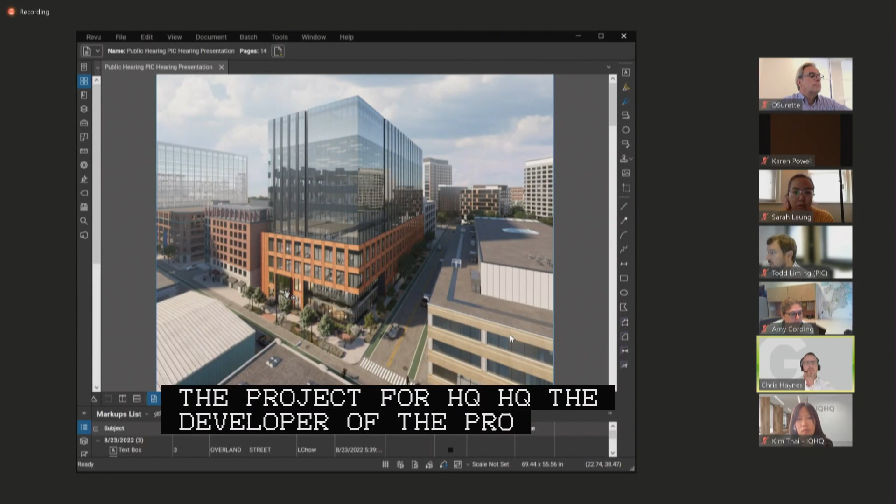The project includes expanded public space, enhanced sidewalks, and bike accommodations along Brookline Ave and Overland Street. Brookline Ave, as you can see in the foreground of this rendering, includes space for extensive landscaping as well as public seating. The project also includes connection to the adjacent multi-use path that you'll see in more detail. There is proposed retail at the corner of Overland and Brookline, as you can see in the rendering, as well as along Overland Street. There's 2,500 square feet of community space on Overland for a community center and STEM training program and lab space.

So that's an overview of the project, and next I'll hand it over to Lisa Chow from VHB. Thank you, Chris. Good morning, members of the Commission. My name is Lisa Chow with VHB. As Chris mentioned, this is a rendering to provide some context for the project. This is another rendering that shows the proposed building entrance.

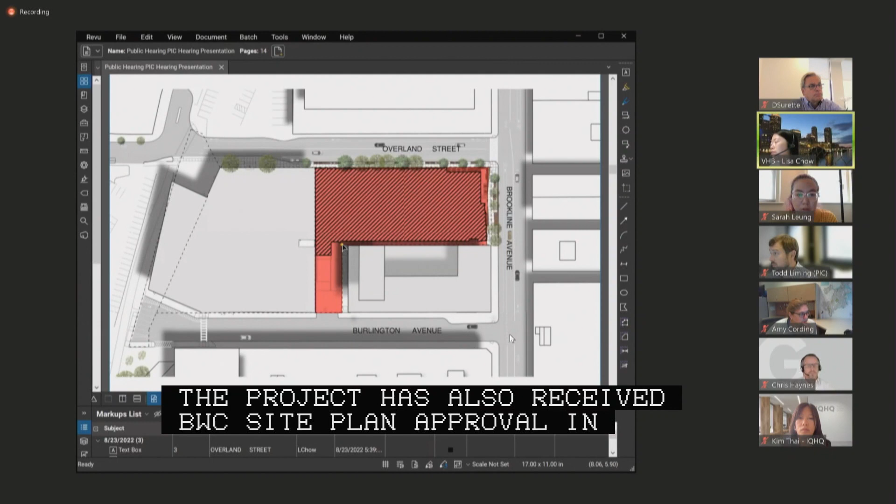This is Brookline Avenue. Before you, there is a site plan that shows the project site hatched in red. The site is bounded to the north by Overland Street, to the east by Brookline Avenue, and to the south by Burlington Avenue. The project has gone through the BPDA process and received BPDA board approval in January 2022. The project has also received BWSC site plan approval in June 2022, and the project has submitted the CMP to BTD and received approval. On behalf of the applicants, we are requesting approval of a pedestrian easement on Brookline Avenue as well as Burlington Avenue to support the proposed streetscape improvements for the proposed 10-story building.

Since the new business hearing on August 25th, the configuration of the proposed Burlington Ave easement has changed. This configuration was changed based on the revised orientation of the ramp connecting Burlington Ave to the adjacent multi-use path that Chris was alluding to. Happy to answer any questions.

Questions or comments by Commission members?

PIC staff? I think we're all set on the easements.

I will entertain a motion on public hearing item number 13. I make a motion to approve a set of joint petitions by IQHQ 109 Brookline 1 LLC and IQHQ 20 Overland LLC for the acceptance of pedestrian easements at Brookline Avenue and Burlington Avenue, as more specifically read into the record by the chair. Second. All in favor? Aye. Aye. Aye. Great.

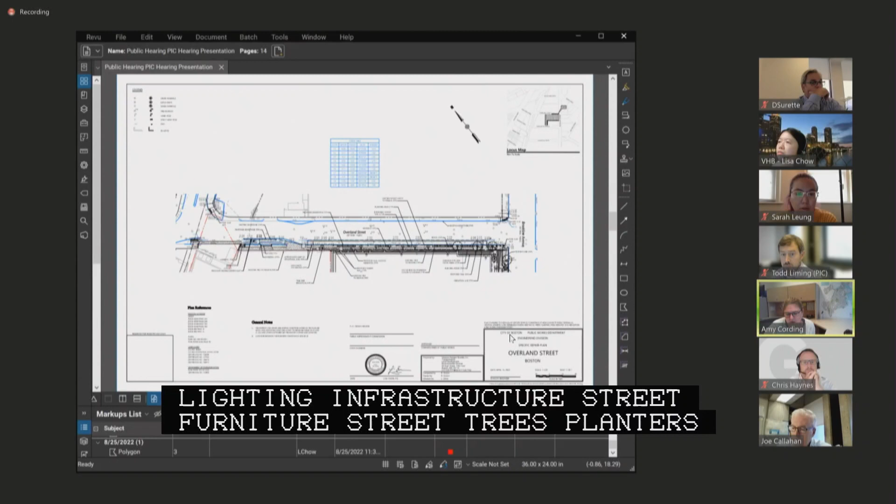Public hearing, item number 14, on a joint petition by IQHQ 109 Brookline 1 LLC and IQHQ 20 Overland LLC for the making of specific repairs within the following public ways in Boston proper, consisting of curb realignment, roadway, sidewalk, and stairway reconstruction, as well as new and relocated pedestrian ramps, specialty pavement, street lighting infrastructure, street furniture, street trees, planters, landscaping, irrigation infrastructure, storm drain infrastructure, bike racks, bollards, driveway curb cuts, and a raised cycle track. Brookline Ave, generally at address number 109 south of Overland Street generally at address number 20 between Brookline Ave and David Ortiz Drive, Maitland Street. Burlington Ave, generally northwest of Burlington Ave, or Brookline Ave. New business 82522, as shown on a set of plans entitled City of Boston Public Works Department Engineering Division Specific Repair Plan, Overland Street, Brookline Ave, Burlington Ave, Boston, 8 sheets dated April 15th, 2022.

Thanks, Amy. Good morning again, members of the commission. Again, Lisa Chow with VHB. On behalf of the applicants, we are requesting the approval of specific repairs on Overland Street, Brookline Avenue, and Burlington Avenue. Proposed streetscape improvements are in association with the proposed 10-story building, and they include new concrete sidewalk, permeable pavers, accessible curb ramps, vertical granite curb cuts, stairs, irrigation lines, and handholds, bike racks, benches, street lights, tree pits, and planting areas. There are a couple changes since the new business hearing.

At the new business hearing, there was a request to provide a cycle track for a portion of Overland Street. The project team studied this further and discussed with BTD and PIC staff. The plan before you shows the incorporation of a cycle track on a portion of Overland Street, approximately fronting the 109 building. The other update is on Burlington Ave. As discussed during the pedestrian easement discussions, the orientation of the pedestrian ramp connecting Burlington Ave to the multi-use path was revised. This was a request related to keep the proposed pedestrian ramp to the multi-use path on IQHQ's property. This request changed the orientation of the ramp as well as the sidewalk improvements. Are there any questions? I'm happy to answer any questions.

I don't have any specific questions, but I would say that we'll probably want to talk about the design of the end of the cycle track, just so that we don't have people parking at the end of it. There's room for one person to make it impossible to get out of in its current iteration.

Questions or comments by commission members? PIC staff? Just want to note the stairway that's being reconstructed on Overland Street. That is an existing stairway. We typically don't like those types of features in the public right of way, but because it's already there and they're just modifying it, we are allowing it in this case.

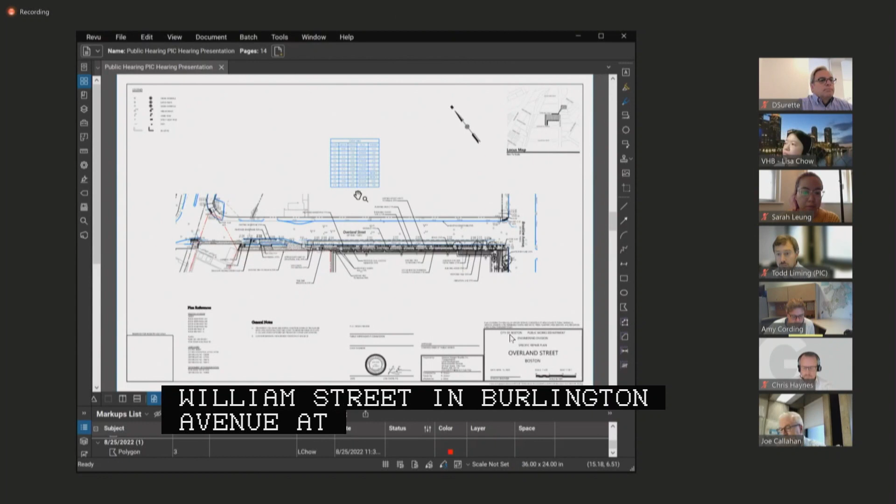All right, I'll entertain a motion on public hearing number 14. I make a motion to approve a joint petition by IQHQ 109 Brookline 1 LLC and IQHQ 20 Overland LLC for specific repairs, as more specifically read into the record by the chair at Brookline Avenue, Overland Street, and Burlington Avenue. Second. All in favor? Aye. Aye. Motion passes. Public hearing item number 15, on a petition by IQHQ 109 Brookline 1 LLC for the granting of an earth retention license for the installation of a temporary earth support system in the following public ways in Boston proper.

Brookline Ave, on its northwesterly side at address 109 southwest of Overland Street on its southwesterly side northwest of Brookline Ave. New business 825-2022 is shown on a plan entitled City of Boston Public Works Department Engineering Division Temporary Earth Retention Plan, 109 Brookline Ave, Boston, one sheet dated March 4th, 22.

Again, my name is Lisa Chow with VHB, and again, on behalf of the applicants, we are requesting the approval of temporary earth support on Overland Street and Brookline Avenue in association with the proposed 10-story building. The proposed temporary earth support include soldier piles and timber lagging outside of the property line, but within the limits of the sidewalk on Overland Street and Brookline Avenue to provide support to allow for the construction of the perimeter cap beam, as well as the removal of a portion of an existing vault. At the new business hearing, there was a comment about the cutoff depth at Brookline Avenue from PIC staff.

Since then, the team has looked into the possibility of increasing that depth further. We also met with PIC staff, and it was agreed that the project will cut down as deep as possible, but no less than 6 feet below ground surface due to the proximity of existing utility lines. The temporary earth support plan before you has been updated to note the cut down depth on Brookline Avenue, as well as updated to reflect the currently proposed slurry wall layout. I'm happy to answer any further questions.

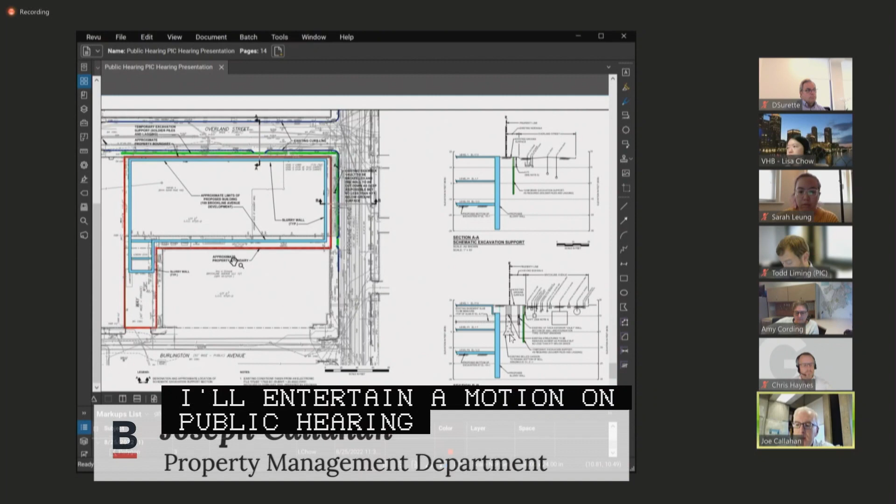I'll entertain a motion on public hearing item number 15. I make a motion to approve a petition by IQHQ 109 Brookline 1 LLC for the granting of an earth retention license in the area of Brookline Ave and Overland Street, as more specifically read into the record by the chair. Second. All in favor? Aye. Motion passes. Thank you.

Public hearing item number 16 on a petition by Wentworth Institute of Technology for the widening and relocation of the existing right-of-way lines of Halleck Street Public Way, Roxbury, located on its northwesterly side at the rear of 600 Parker Street, generally between Prentice Street and Station Street. New business 82522 is shown on a plan entitled City of Boston Public Works Department Engineering Division Widening Relocation, Halleck Street Public Way, Roxbury, District 1, sheet dated August 22.

Hello there, good morning. My name is Jennifer Schultz and I am Permitting and Land Use Counsel for Wentworth Institute of Technology. I'm here to request a 2-week continuance until October 6th for this petition, and I'll be saying the same thing for the next 2 petitions in order to provide the petitioner a little bit more time to work with city staff to ensure that all petitions are mutually acceptable to everybody.

Great. You're going to have to bear with us on the reading of this, but I will entertain a motion to continue public hearing item number 16 for 2 weeks until October 6th. I make a motion to continue public hearing agenda item 16, petition by Wentworth Institute of Technology for the widening and relocation at Halleck Street, as more particularly read into the record by the chair, for 2 weeks until October 6th. Second. All in favor? Aye. See you in 2 weeks.

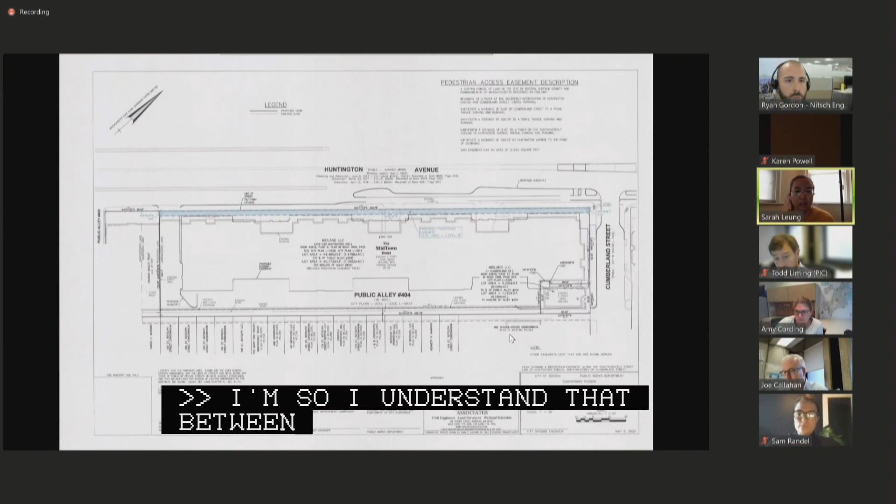Questions or comments by commission members? So I understand that between the new business and public hearing, there were some adjustments to the position of trees. Does this at all affect the bounds of the pedestrian easement that you're requesting today?

This doesn't affect the pedestrian easement area that we are requesting. Some of the trees are specifically on the west side of Huntington Ave. It reduces and creates a pinch point of about 6.5 feet in select locations, but overall for the rest of the remaining length of the project, we have 8 feet.

Great, thank you. I think the Disability Commission received the plans only yesterday, so we haven't had the opportunity to go in depth and really take a look at the plans and the impacts of the relocation of the trees. I did talk with your colleague the other day, but I think there was a recent development I wasn't aware of, due to some structural issues with the building in the complex, of what I had previously thought the configuration might be.

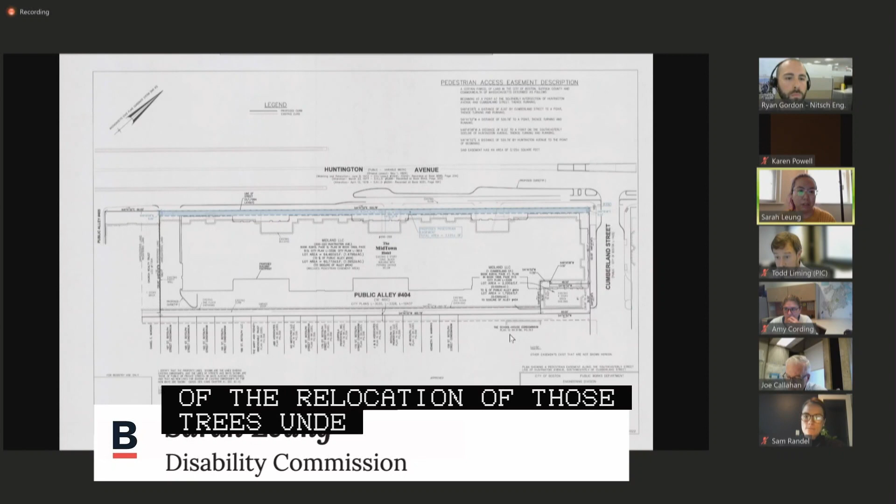And I understand there as well that there's other outstanding questions from the BPDA. So I think we would want to request more time to be able to have the opportunity to really take a look at the impacts of the relocation of those trees on the pedestrian path of travel, because it's not typically what the Disability Commission expects for a new construction building. We do understand that there were some utility conflicts that resulted in this, but we still want to have the opportunity to take that time to review.

Yeah, we'll work with you to address any comments that you have. So you guys okay coming back in 2 weeks? That's fine. Okay, I will entertain a motion to continue public hearing item number 19 for 2 weeks until October 6th. I make a motion to continue public hearing agenda item 19 for 2 weeks until the next PIC hearing on October 6th. Second. All in favor? Aye. All right, see you in 2 weeks.

So my assumption is that so goes the next two as far as continuances, but I mean, we have to go through all of this, but I assume that's acceptable to the project team.

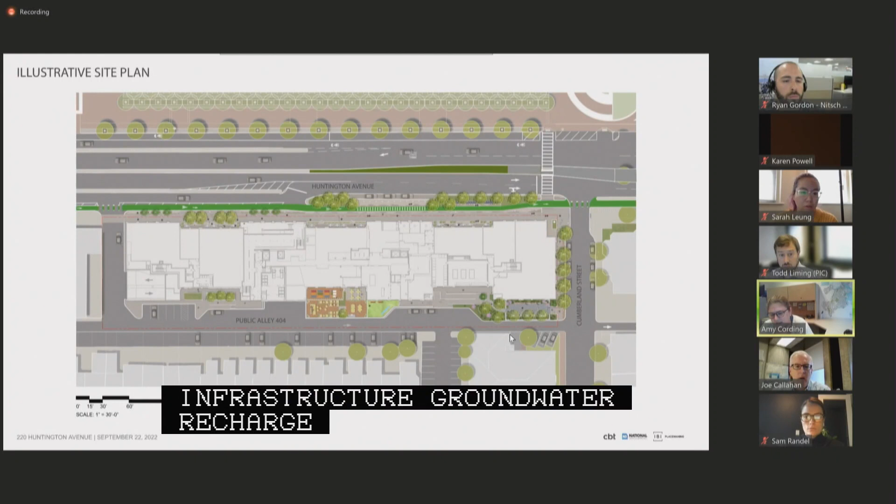Public hearing item number 20 on a joint petition by Midland LLC and Midtown Tenant LLC for the making of specific repairs within the following public ways in Boston proper, consisting of curb realignment, roadway and sidewalk reconstruction, as well as new and relocated pedestrian ramps, specialty pavement, traffic signal infrastructure, street lighting infrastructure, street furniture, street trees, planters, landscaping, storm drain infrastructure, groundwater recharge infrastructure, bike racks, bollards, trash receptacles, driveway curb cuts, and a raised cycle track. Huntington Ave at addresses number 200 to 220, generally southwest of Cumberland Street, generally between Huntington Ave and Public Alley number 404.

Public Alley 404, southwest of Cumberland Street. New business 82522 is shown on a set of plans entitled City of Boston Public Works Department, Engineering Division, Specific Repair Plans, 220 Huntington Ave, Public Way, Back Bay, 5 sheets dated September 21st, 22.

Hi, Sam Randel again, representing the applicant, Midtown Tenant LLC. I understand that this will likely also be continued. We are fine with that.

I know Sarah needs more time to review, but I thought it would make sense to have Ryan run through the quick tweaks we made to the trees. We added 4 street trees on the western portion of the Huntington Ave streetscape public realm, basically to respond to comments from the BPDA. So Ryan, I'll hand it over to you.

Sure. So on the west side of Huntington Ave, we are limited because of the underpass coming up at grade halfway through the site. So this is where we are maintaining the existing curb line. We have a new bike lane coming through here, and we have some street trees in the furnishing zone, as well as these new trees to respond to the BPDA's comments. And this is the area I was talking about with the pedestrian easement.

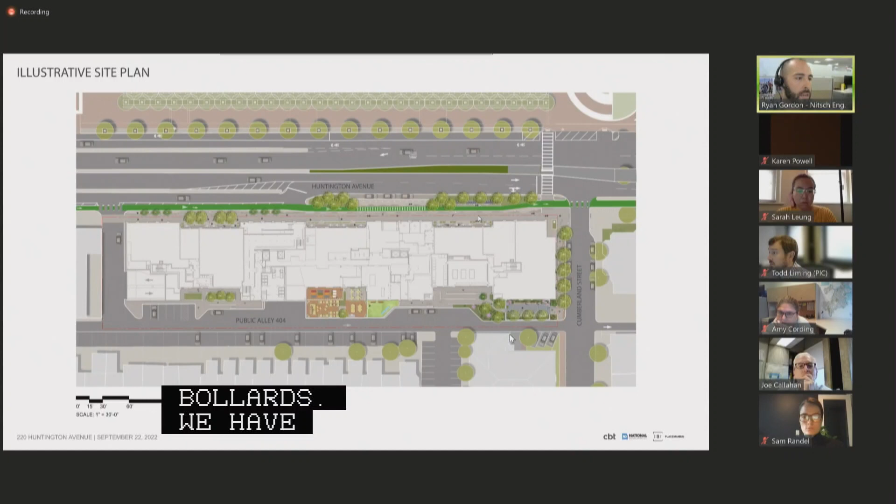And then as we move through the site, we have the bike lane that transitions onto the sidewalk. We have a drop-off area with bollards. We have new trees with the bumped out curb and the wider concrete path of travel, new street trees, street lights, bike racks.

We have the reconfigured crosswalk at the Cumberland-Huntington Ave intersection. We're moving the crosswalk from the east side to the west side, new wide crosswalk, 14 feet. We have a new bump out at the Cumberland intersection, new street trees along Cumberland, street lights, bike racks.

We also have full depth reconstruction of the intersection and cold plane and overlay for some parts of Huntington Ave and Cumberland Street. And we're also doing full depth reconstruction for Public Alley 404 for the full length of the project. One thing to add is the last time we were here, you may recall the bike lane and the furnishing zone were flipped.

So now we're showing the bike lane inside of the furnishing zone. That allowed us to add a significant number of street trees to the plan, which we think improves the public realm. Again, we worked offline with the BPDA and others in the city to make this tweak over the last couple of weeks, which we think is an improvement.

And Sam, I'll just add too, this is Chris Haynes from IBI. The issue on the western edge of the site that Sarah was alluding to was the fact that the furnishing zone for that entire western stretch occurs over a water line and a sewer line, or a steam line. As a result, we weren't able to get any trees in ground. So the 6 trees you see that are smaller are actually in planters.

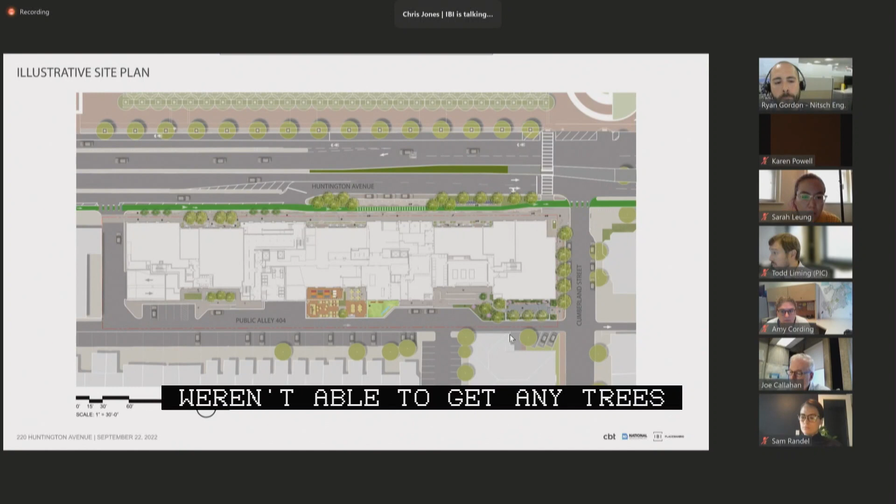And the proposal intended, through working with Diane and Jill and the BPDA, to try to come up with a solution for in-ground trees that are set back closer to the face of the building. It's creating a little bit of a circuitous route for pedestrian circulation, and that's what Sarah wants to take a closer look at - those 4 trees specifically and their location.

Is there questions or comments on this from commission members that they'd like to see modifications to in the next 2 weeks? I just had a quick question while I have you all here.

Is the 6.5 clearance from the tree grate or from the tree trunk? What is that measurement being taken from? Those trees aren't in grates, so... They are, they're in tree grate. So it's 6.5 feet to the tree grate. It's about 7 and a smidge to the edge of the trunk. Okay, thank you. I can take from the back of the curb. From the back of the curb. Okay, I can take that back to my team. Thank you.

So 2 weeks is going to be enough time for this? All right, I will entertain a motion to continue public hearing item number 20 for 2 weeks until our October 6th hearing. I make a motion to continue public hearing agenda item 20 for 2 weeks to the next PIC hearing on October 6th.

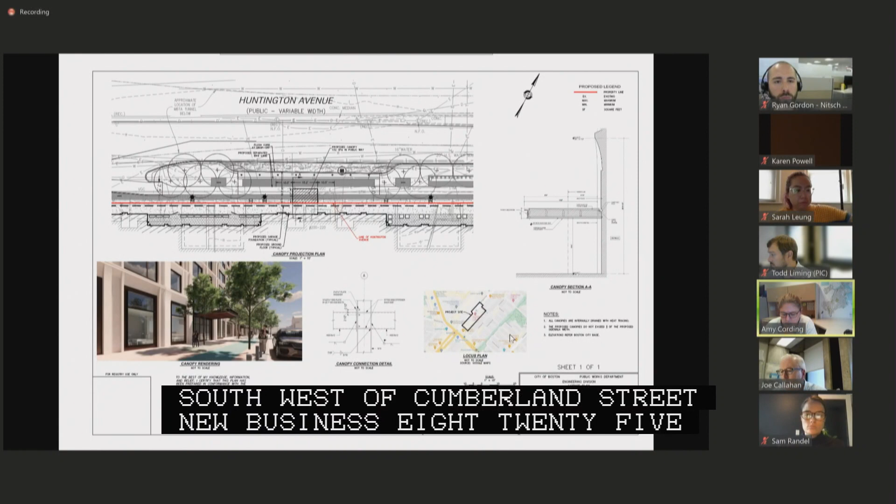Public hearing item number 21 on a joint petition by Midland LLC and Midtown Tenant LLC for the granting of a projection license for the installation of a canopy over a portion of the sidewalk within Huntington Avenue public way, Boston proper, located southeasterly side at address numbers 200 to 220, generally southwest of Cumberland Street, new business 8-25-22, is shown on a plan entitled City of Boston Public Works Department Engineering Division License Plan 220 Huntington Ave, Public Way, Back Bay, one sheet dated August 18th, '22.

Hi again, Sam Randel, representing the applicant Midtown Tenant LLC. So as you stated, we're requesting a canopy license. This is the main entry of the residential portion of the building. I believe this will not be changing as a result of the public realm work we're still contemplating with accessibility. But Ryan, do you want to expand on this piece?

Sure. As Sam said, the new canopy is at the main entrance of the building. The canopy area within the public way is approximately 132 square feet, extends about 8.7 feet out into the public way, out of 19 feet to the new curb line. If anyone has questions, I'll add we have 11 feet clear from the sidewalk to the canopy, and the canopy is removable, heat trace, and drains internally to the building.

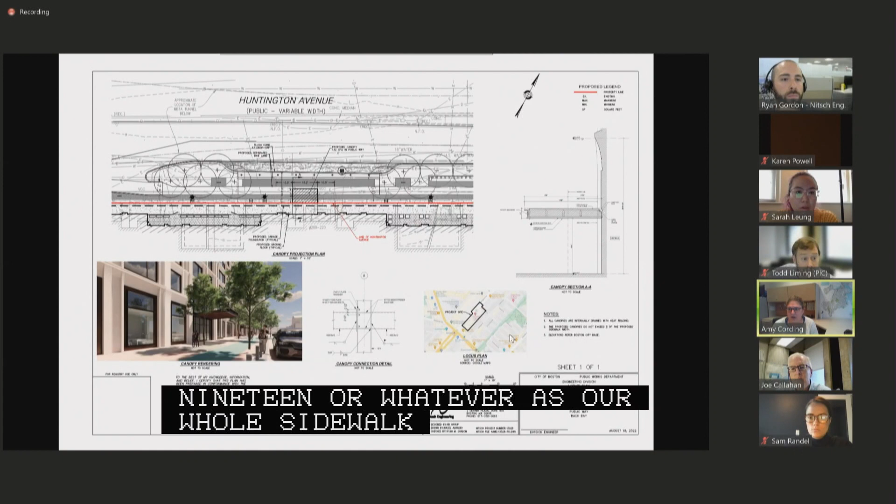I'm not sure you can use the full dimension out to the 19 feet or whatever as our whole sidewalk dimension to get your allowable canopy dimension, but I'll let Todd give the details of what the requirements will be. Yeah, I think we're going to want to see this comply with a 2/3 rule as measured from the face of the building to the edge of the bike lane.

So will 2 weeks be enough time for us to give you more details on that? It's 2/3 of the sidewalk, not sidewalk and bike lane, regardless of the level of the bike lane, for that dimension. So I'm assuming 2 weeks we can figure this out? Yes.

I will entertain a motion to continue public hearing item number 21 for 2 weeks until our October 6th hearing. I make a motion to continue public hearing agenda item number 21 for 2 weeks until the next hearing on October 6th. Second. All in favor? Aye. All right, we'll see you in 2 weeks.

Thank you. Public hearing item number 22, on a petition by Comcast Boston Inc. for a grant of location with lead company status and no participants to install new telecommunication conduit with city shadow within the following public ways in Boston proper: Harcourt Street at the rear of 100 Huntington Ave between St. Botolph Street and Public Alley number 401, Public Alley number 401 southwest of Harcourt Street, new business 8-25-22, is shown on a plan entitled City of Boston Public Works Department Engineering Division Grant of Location Plan 100 Huntington Ave, Harcourt Street, Public Alley 401, Boston, one sheet dated November 2021.

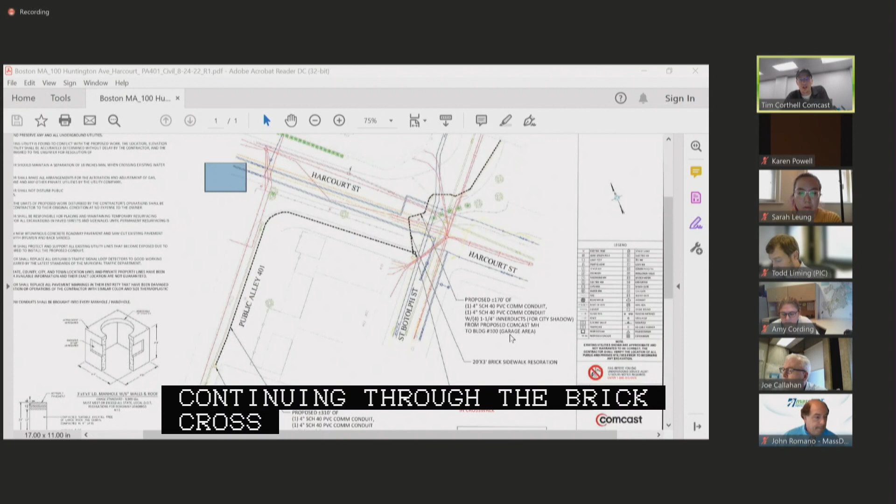Good morning, members of the commission. Tim Corthell here, representing Comcast. Just a quick overview of the project. We have an existing manhole out the back, Public Alley 401. We're going to continue down to the intersection of St. Botolph and Harcourt Street, and then continuing through the brick crosswalk area to the Copley Place garage area, just to bring another service into the Copley Place Mall, providing for many customers in there waiting for service.

Sorry, I just wanted to share again one picture that was a concern last time. There is some brickwork that has been in disarray, but we will take care of that if we impede any of this and go through the brickwork here.

Great. Questions or comments from commission members? PIC staff? All set. I'll entertain a motion to approve public hearing item number 22. I make a motion to approve a petition by Comcast of Boston for a grant of location at Harcourt Street, Public Alley number 401, as more specifically read into the record by the chair. Second. All in favor? Aye. Awesome, thank you. No problem.

Public hearing item number 23 on a petition by Extenet Systems for a grant of location with lead company status and no participants to install new telecommunication conduit with city shadow within the following public ways in East Boston: Saratoga Street, generally between Chaucer Street and Brandywine Drive, Wordsworth Street, northwest of Saratoga Street, new business 8-25-22, is shown on a set of plans entitled City of Boston Public Works Department Engineering Division Grant of Location Plan, Wordsworth Street, Saratoga Street, East Boston, 14 sheets dated August '22.

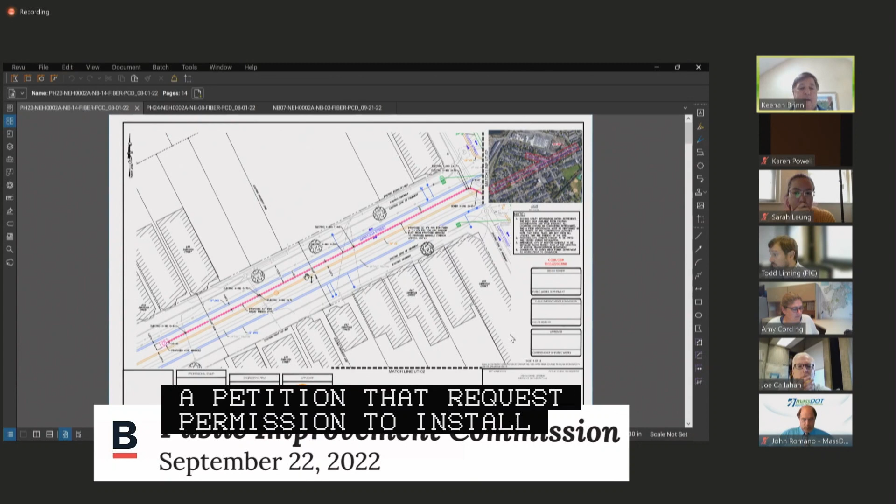We're back in front of you for a petition requesting permission to install a 4-inch fiber conduit in the public right-of-way. This fiber run starts from a manhole on Saratoga Street and continues northeast, crossing Moore Street, continuing on Saratoga, crossing Byron Street, and heading west on Wordsworth Street. There are two spurs leading to poles at the intersection of Addison Street, and it finally continues on Saratoga Street. The total run of this installation is approximately 3,542 feet.

Extenet will install the city shadow duct and try to work with local businesses and entrepreneurs about parking during construction. We were here three weeks ago. I don't recall any questions or concerns raised, but we'd be happy to hear any questions now.

Questions or comments from commission members? PIC staff? All set. I'll entertain a motion to approve public hearing item number 23. I make a motion to approve a petition by Extenet Systems for a grant of location in the area of Saratoga Street and Wordsworth Street as more specifically read into the record by the chair. Second. All in favor? Aye.

Public hearing item number 24, on a petition by Extenet Systems, Inc. for a grant of location with lead company status and no participants to install a new telecommunication conduit with city shadow within the following public ways in East Boston: Meridian Street, generally between Gove and Porter Street / Bennington Street, Gove Street, southeast of Meridian Street, Central Square, generally between Meridian Street and Border Street. New business 82522 is shown on a set of plans entitled City of Boston Public Works Department Engineering Division Grant of Location Plan, Gove Street, Meridian Street, Central Square, East Boston, 8 sheets dated August 22.

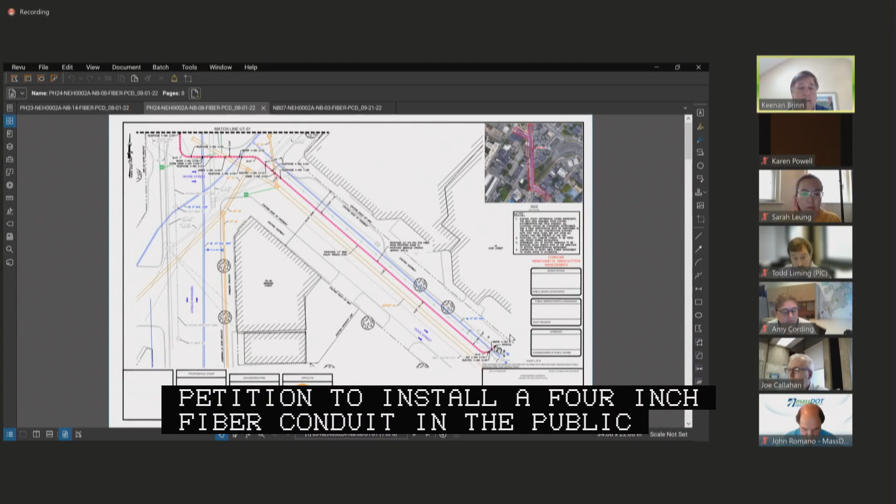Good morning again, Commissioners. Keenan Brinn here on behalf of Extenet Systems, joined by Han and Arthur Pino. We have a similar request here, a fiber petition to install a 4-inch fiber conduit in the public right-of-way. This fiber run begins on Gove Street, turns onto Meridian, heads north into Central Square, heads west, and terminates there. The total run is about 1,170 feet.

Extenet will install a city shadow duct and work with the local community and entrepreneurs about parking and construction management. We were here three weeks ago, and I don't recall any questions or concerns about this run either, but we'd be happy to entertain any questions now.

Questions or comments from commission members? Okay, I see staff. All set. I'll entertain a motion to approve public hearing item number 24. I make a motion to approve a petition by Extenet Systems for a grant of location at Meridian and Gove Streets and Central Square as more specifically read into the record by the chair. Second. All in favor? Aye. Great, thank you.

All right, on to my favorite, the city roadway acceptance portion of our hearing.

On a petition by the Commonwealth of Massachusetts Department of Transportation for the acceptance of city roadways of the following public ways in Boston proper: Cross Street between Hanover Street and North Washington Street / Cooper Street, Salem Street northeast of Cross Street, Endicott Street between Cross Street and Stillman Street, Stillman Street between Cross Street and Endicott Street, North Washington Street between Valenti Way and New Chardon Street / Fitzgerald Surface Road, Beverly Street between North Washington Street and Causeway Street, Anthony Rip Valenti Way between North Washington Street and Canal Street, Causeway Street between Haverhill Street and Lovejoy Wharf.

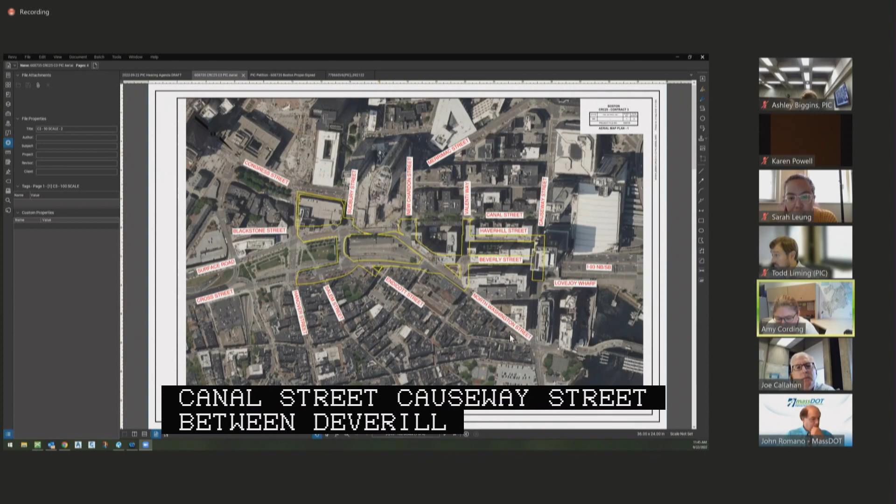John F. Fitzgerald Expressway Surface Road between Hanover Street and New Chardon Street / North Washington Street, Sudbury Street between Cross Street and Congress Street / Merrimack Street, New Chardon Street between Canal Street and Fitzgerald Surface Road / North Washington Street, Hanover Street between Blackstone Street and Congress Street, Haverhill Street between Valenti Way and Causeway Street, Congress Street between Hanover Street and Sudbury Street / Merrimack Street, Beach Street generally at Fitzgerald Surface Road, is shown on a set of plans entitled Public Roadway Acceptance Plan, Cross Street, John F. Fitzgerald Surface Road, Hanover Street, North Washington Street, Beverly Street, Valenti Way, Causeway Street, Salem Street, Endicott Street, Sudbury Street, New Chardon Street, Haverhill Street, Beach Street, Boston proper, 32 sheets dated September 22, 22. John?

Madam Chair, John Romano from Mass Department of Transportation. I'm here with Alan Ramirez from Mass DOT and also Matt Goldie from HDR, who's controlling the plans on the screen.

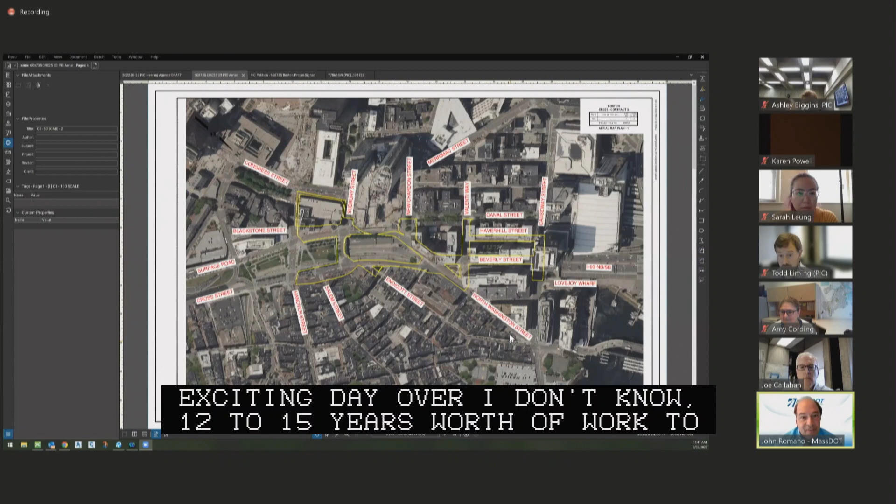As you stated, we're here for the Public Improvement Commission to accept these streets and the work that we did to get them prepared. This is a pretty exciting day - over 12 to 15 years worth of work for yourself, Todd, from the staff. We've been working collectively on this, and hundreds and hundreds of hours have gone into getting to this point. Should these be accepted today, this will culminate all of the streets in the downtown area being turned over to the city. And we're pretty excited about this.

Today we bring the remaining part of contract area 3, which is generally from Hanover Street, where it connects where we came and were approved in February, all the way down to Causeway Street, which is the end of the downtown section of contract area 3. This will give us from Kneeland Street all the way to Causeway Street, all of the streets and sidewalks in the downtown area turned back over to the city of Boston, starting back in Tip O'Neill's days in the Big Dig. So I'm happy to answer any questions or concerns from yourself and the commission members.

Fantastic. We'll have to wait for the first nice day and go for a walk to celebrate.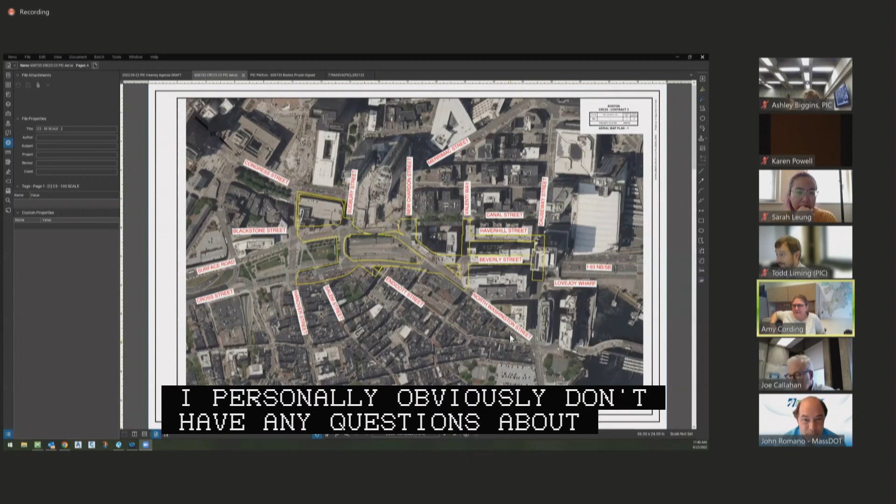I personally don't have any questions about this one, but commission members, questions or comments? PIC staff? No. All right, well then I happily will entertain a motion on city roadway acceptance item number 1.

I make a motion to approve agenda item city roadway acceptance number 1, a petition by the Commonwealth of Massachusetts Department of Transportation for the acceptance of city roadways, generally in the area of North Washington Street, Hanover Street, and Causeway Street, as more specifically read into the record by the chair. Second. All in favor? Aye.

All right, thank you, John. Thank you, Amy. Thank you, Todd, for all your help. We'll be back in a few months with the Seaport area. Thank you. I can't wait. Thanks.

All right, on to our new business. New business item number 1, 100 Weld Street, 1400 Centre Street, West Roxbury, vertical discontinuances, specific repair plans on a set of petitions by Horizon Development, LLC.

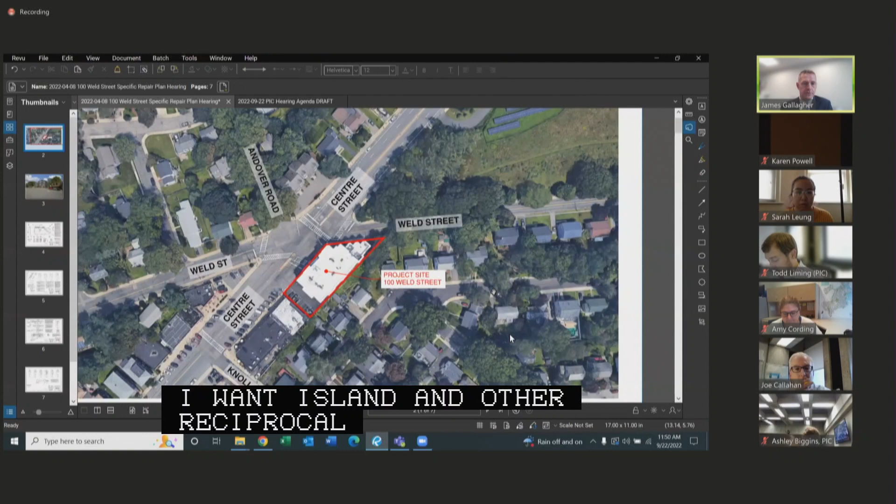That original picture there, or the overhead picture, shows the building as constructed. We've been working to come forward with both the vertical discontinuance, because there are some overhangs, and specific repair plans to address sidewalk, island, and other reciprocal sidewalk issues. And I will turn it over to Mr. Messenger to take you through the plans to give everyone a better idea.

Thank you, Jim. Again, my name is Bob Messenger from Howard Stein Hudson. Just for the locus map here, Jim already mentioned, we're in Roslindale. Weld Street's running through the center of your screen here. We have Centre Street running bottom left to top right, and Andover Road also here. So to start, the project has some discontinuances on this stretch, both on Centre Street and Weld Street.

This is an image showing the building on Centre Street. We have a few different levels of projections over the right-of-way - there's a main roof level, a mid-roof level, and a lower roof level. And there are some bay projections as well, which I will get into.

Plan view of this discontinuance. This is Centre Street right here and Weld Street. This shows the overall footprint of the projections, but as I mentioned, it's on a few different levels, so I'll show you those sections. And on Weld Street here, we have smaller projections as well for the roof.

I'll start here on Weld Street. Here we have the same image, just a different orientation, so these are triangular projections from the roof levels. On this section view, you can see we have the main roof level higher up, and then a lower roof level where there's projections. And these in total are about 35 cubic feet for this whole side of the street.

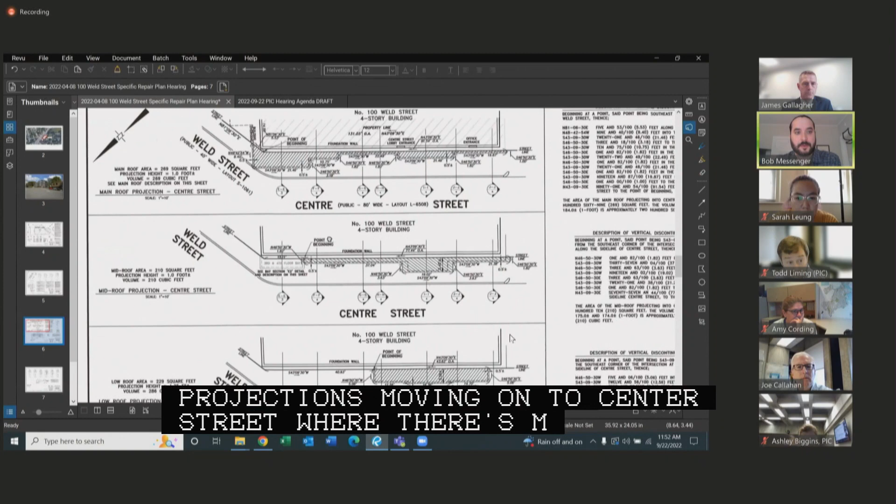Moving on to Centre Street, where there's more significant discontinuances. As I mentioned, they're on a few different roof levels. So this plan view here is showing the main roof projection on the highest point, and that is 269 square feet total.

And the cubic feet is also 269 cubic feet because it's a 1 foot roof projection in elevation. The mid roof projection's a little bit lower, that's 210 square feet. And the lower roof projection is 229 square feet.

And it's probably easier to visualize on this section view. Got the main roof area up top, mid roof area and lower roof. And I mentioned earlier the bays, so those are also included.

This 3rd and 4th floor bay, that volume is about 1,300 cubic feet. And there's a 2nd and 3rd floor bay that has a volume of 1,600 cubic feet. And you're on Centre Street looking at the building here, Weld Street intersection is to your left.

And just for a nice section view here, here's what the bay looks like. You have the main roof level, which I previously pointed out. And then this bay here on the 3rd and 4th floor bumps out a little under 4 feet.

For another section, the 2nd and 3rd floor bay, see the upper main level roof, you have your mid roof, and then the 2nd and 3rd floor bay here. And again, bumping out a little under 4 feet, and then the lower roof section as well.

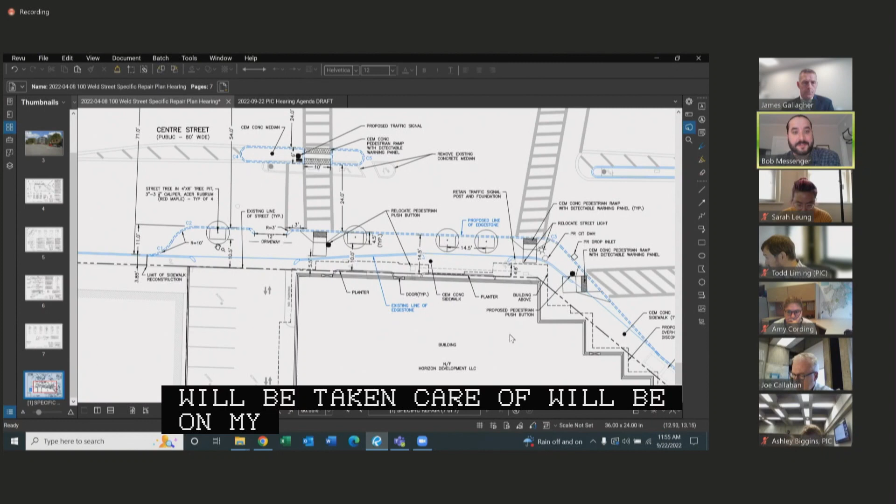We're bumping out this sidewalk significantly. In this stretch here on Centre Street, we have 10.5 feet from behind the street trees to the property line. As I mentioned, street trees, we have 4 in total on Centre Street. There aren't any on Weld Street, but we're proposing 4 here on Centre.

We are relocating all these existing ramps for the intersection improvements, and those new ramps will have pedestrian push buttons, and they're better located for a straight crossing and less severe angles and shorter crossings.

And again, as we're moving toward the intersection, these new ramps and curb realignment, we will be relocating the street lighting and adjusting utilities as needed. And on Weld Street, it's curb realignment and this ramp here, but mostly just sidewalk reconstruction.

And for the intersection overall, as I mentioned, we coordinated with the city and got their recommendations for design. So all these ramps, as I mentioned, will be reconstructed. We're relocating this median and bumping out the curb here to provide a nice safe crossing.

The existing condition crossing was a lot more severe in angle and much longer of a crossing, so this will hopefully provide a safer avenue for pedestrians.

And we're doing the reciprocal ramps for the limits of the project. And of course, this is all new cement concrete, and we'll have new pedestrian push buttons for all of these new ramps. And again, any associated utilities will be relocated or adjusted as needed.

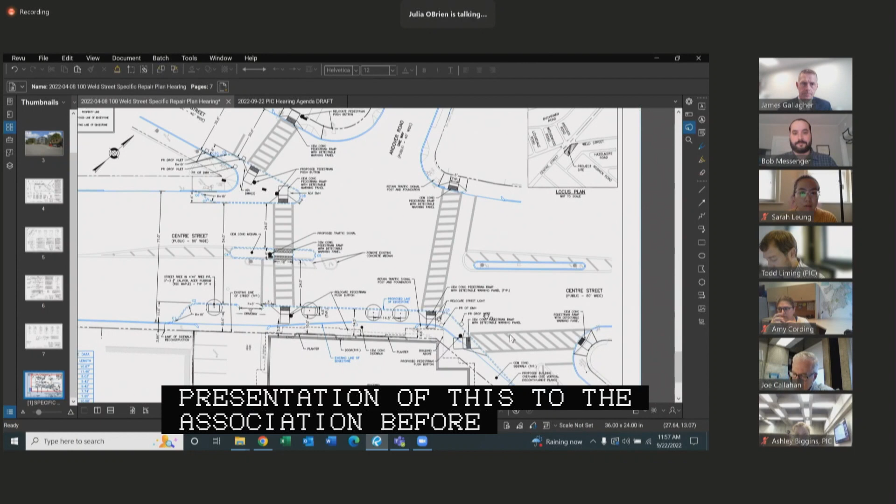I'm here really on behalf of the Longfellow Area Neighborhood Association. We would very much like a presentation of this to the association before any PIC approval. We're unaware, maybe it's our fault, but we were unaware that the plans had proceeded to quite this extent, and do have a number of questions about it that would probably be easily answered by a presentation at an upcoming meeting, either perhaps on the 17th of October or early in November.

The other question that has been raised by some is one of process that we're a little unfamiliar with. Are vertical discontinuances usually granted after the construction of a building or prior to construction? Typically prior. So this is unusual in that respect. Yes, all of these actions would typically happen prior to construction. Well, I'm glad they're happening now.

So I guess my question is, we would ask the proponent if they would be willing to come to an upcoming LANA meeting and make a presentation of this. It's a curious intersection. It's badly skewed and probably difficult to deal with as a result.

We're interested in the left turn from Centre Street onto Weld Street. We're interested in the dimensions of Weld Street. There is a... looks like you've remuted. Sorry. On the plan, it shows retaining a gas vault on Weld Street.

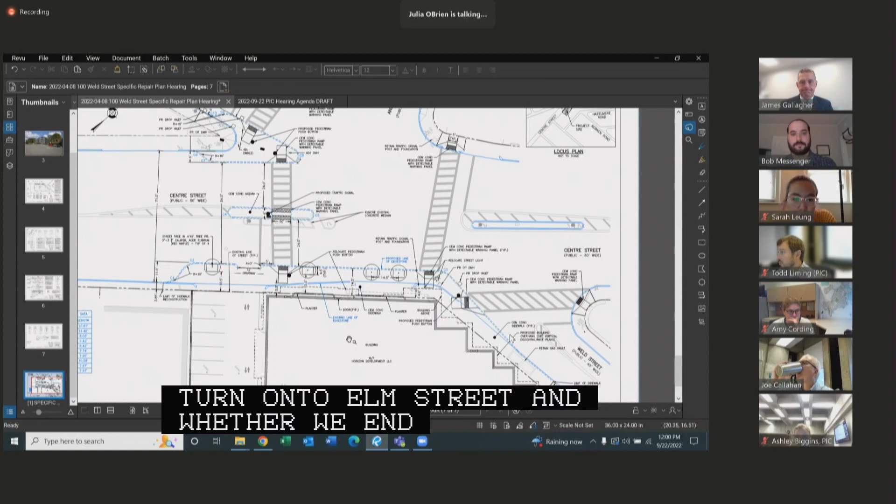We're also curious about the dimensions on Center Street for the left turn, Centre Street northbound for the left turn onto Weld Street, and whether we end up with 2 lanes of traffic on Center Street going inbound or not. So there seem to be some dimensions lacking on the plans for us. So those are just a general set of comments, but basically what we're asking for is some community review and discussion prior to PIC continuing.

Is the project team amenable to meeting with the neighborhood group to walk through the plans? I'd have to speak to my clients.

I would say that to some of the things that Mrs. O'Brien brought up, I don't know that that's actually in the cognizance of my clients. The left turn from Center Street to Weld, some of those things aren't under our control, or the extended sidewalk on Weld Street, which I'm familiar with from being in the area.

So I guess there's a couple things that we can address. So, to Ms. O'Brien's comments, this is somewhat out of order for how we usually do review. So yes, typically the vertical discontinuances and these specific repairs would have come in advance.

With this right now, a lot of what you're seeing here is the project team reacting to comments from the city, both the Transportation Department, Public Works Department, and the Commission for Persons with Disabilities regarding issues with both the geometry and accessibility at this intersection. So a lot of this work is them doing this on our behalf, at our request, so that we could take a stab at making this better, safer, better crossings, and do some work helping the alignment. So that's what they've done here at our request.

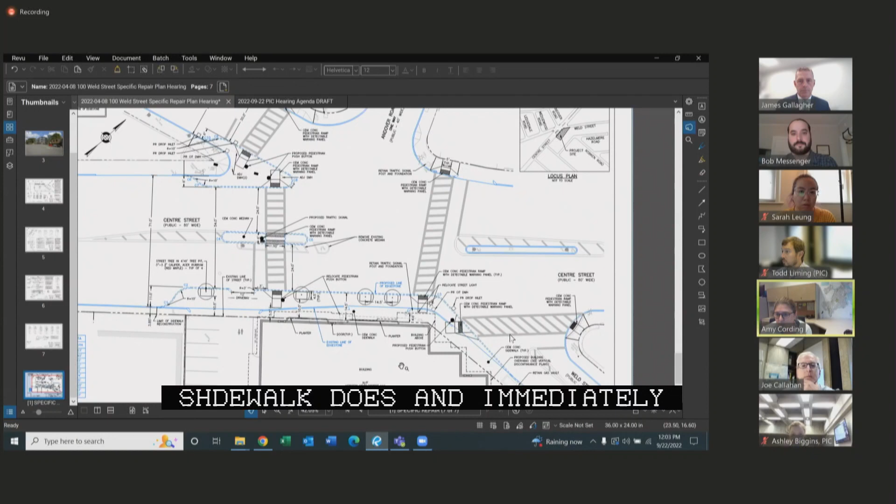But I will say that is not necessarily the purview of this particular project or project team. I'm happy to have them come and talk to you about what's happening here and give you a walkthrough of the plans. I think some of the plans with additional pavement markings might help you contextually with how traffic would move through here, that I'm sure they can also share with you.

So I guess the desire would be for the project team to meet with the community to walk them through the plans, with full understanding of you being able to tell them what is and is not within the scope of this project. Yeah, but let me just confirm with my client what's happening. We can do that.

Sorry to interrupt. So I guess then my question is, do we think we can pull off this meeting in 2 weeks, or would you guys prefer 4 weeks?

From the Longfellow Area Neighborhood Association point of view, 4 weeks would be better. Would that be acceptable to the project team? Yes, I'm sure we could get it done.

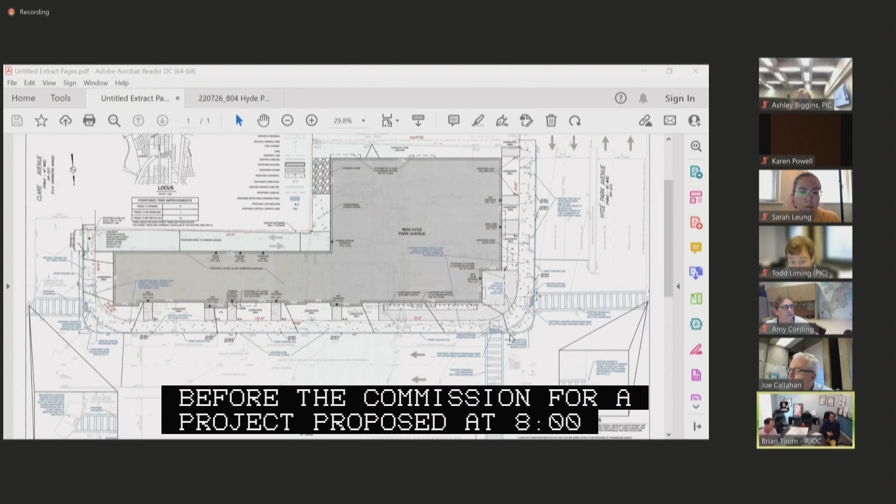We're proposing the demolition of 2 existing single-family homes and the construction of a 34-unit multi-story residential building on the lot. We're here before the commission for the specific repairs that will occur in the public realm, essentially closing 2 existing curb cuts located on American Legion Highway, in these locations, and another here. We'll be creating a new curb cut on Clare Avenue, providing vehicular access to a 19-space parking garage on the first floor of the new building.

We will also be modifying the curb realignments at the intersections of American Legion Highway and Hyde Park Avenue, shown here, and at American Legion Highway and Clare Avenue here, essentially making those radii a little tighter and improving pedestrian movements in that location. We'll be rebuilding and reconstructing curb ramps at those locations, as you can see in these 3 locations.

That's essentially what we're looking to do in the public realm here, and we're open to any questions.

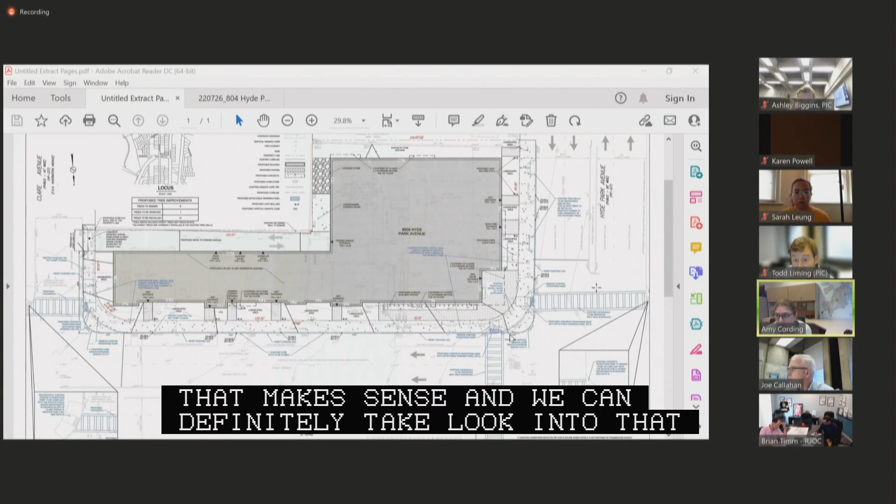Questions or comments by other commission members? Todd? All set? All right, is 2 weeks going to be enough time for you guys? We will do what we can here for sure and submit revised plans. Great, so we'll see you on October 6th. Sounds great, thank you.

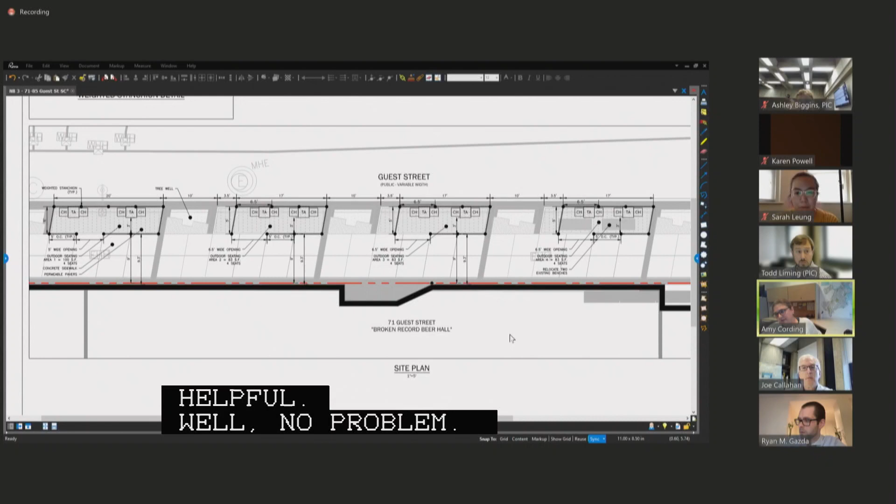Questions or comments from other commission members? PIC staff, two very quick things. One, we'd like the proponent to recognize that the current state liquor laws have been relaxed due to COVID and currently allow the service of alcohol across the public sidewalk, as shown here. That may or may not continue, so any service to these seating areas away from the building will need to comply with all state liquor license laws.

And two, you're showing two existing benches here on the right that are proposed to be relocated. You don't need to tell us right now, but we would like a little bit more information on where you envision those going. So if we can connect on that, Ryan, offline, that'd be great. Yep, absolutely noted on the issue with respect to compliance, and we do have a plan showing where the benches will be relocated, so I can get that over to you.

Thank you. 2 weeks gonna be enough time? I believe it should be good on our end. All right, I'll see you in 2 weeks then. Thank you very much.

New business number 4, 621 Beacon Street, Boston proper, grant of location on a set of petitions by Cambridge Network Solutions LLC.

Can you hear me? Yes. Okay, let's see. Can you see me? Yeah, there we go. Yes. Excellent. Let me share my screen. I haven't done this in a while. And that is this plan right here.

Good afternoon, members of the commission. This is Herb Bertoni from Cambridge Network Solutions. We are proposing to place 261 feet of 2 4-inch PVC conduit, one of those a city shadow conduit, and 1 3x3 handhole between 2 Eversource manholes on Beacon Street, starting at Kenmore Street, as shown on this plan.

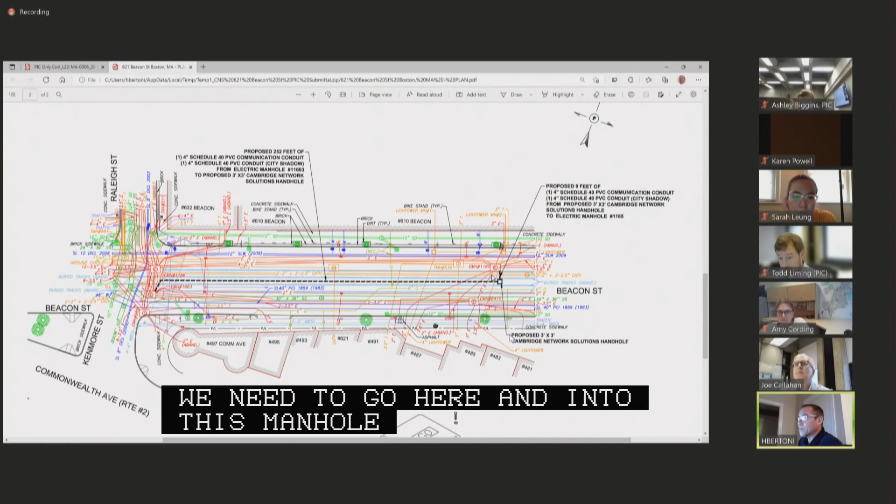Let's see the whole thing. So coming out of this Eversource manhole, running down, placing a handhole here, and into this other Eversource manhole. So if anybody has any questions, I'll field those.

Questions or comments by commission members? Todd? Good. 2 weeks, I'm assuming will be enough? All right, see you in 2 weeks. Thank you.

New business number 5, Louis Prang Street at 20 Museum Road, Roxbury, grant of location on a petition by Cambridge Network Solutions LLC. And that would be me also.

So this one is another conduit build of Louis Prang. It's approximately 271 feet, 2 4-inch PVC conduit, which includes city shadow. It runs from the intersection of Evans Way down into the rear of 20 Museum Road.

I'll field any questions if anybody has. Questions or comments by commission members? Todd? All set. All right, we'll see you in 2 weeks. Okay, great. Thank you very much.

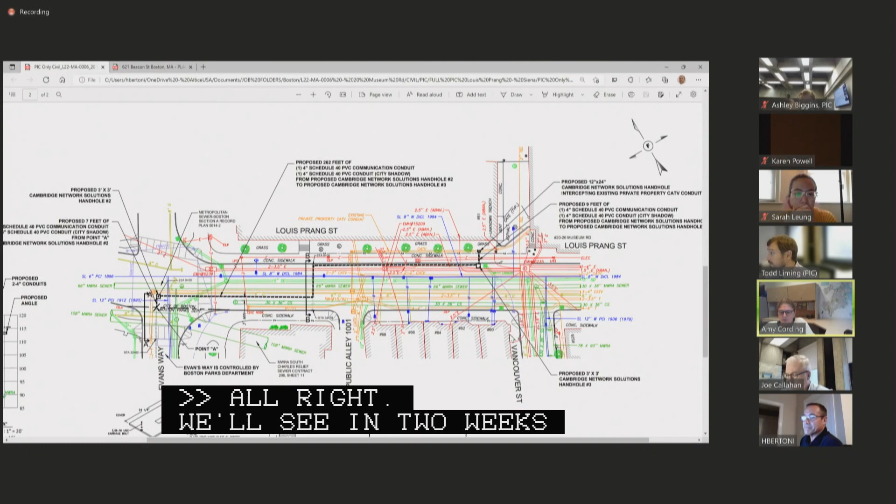All right, new business number 6, Cottage Street, Webster Street, Sumner Street, East Boston, grant of location on a petition by ExteNet Systems.